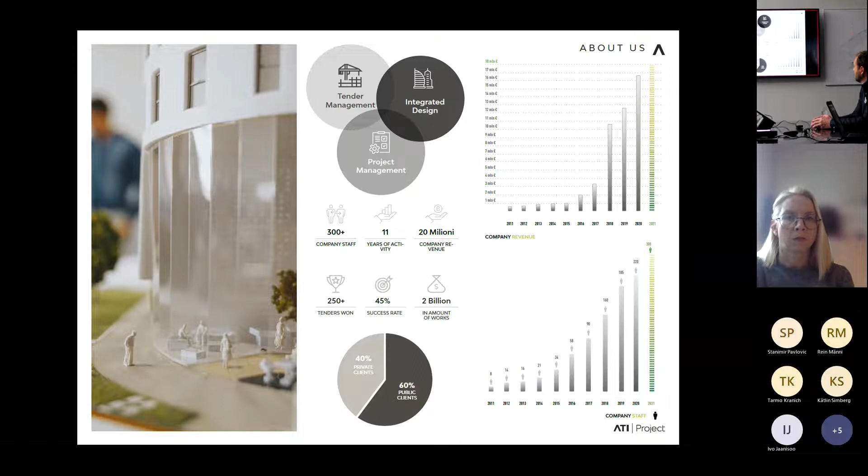Then we have tender management services, which very often follow up to the project management services. We start with consulting in the tender stage, sometimes for general contractors and sometimes for public authorities or private investors, and then we follow up during the construction stage. We were more or less 60% public and 40% private investor, just to give an idea.

When we speak about tenders, we usually have this double possible involvement. When we work for general contractors, usually the first question is: how can you help us evaluate the tender price and conditions, and how can you help us win the tender? Then, depending on which procedure we're dealing with, sometimes you do value engineering, sometimes you organize the construction site.

Sometimes there are particular requirements regarding BIM. Sometimes the client wants to know how you will manage the process, how you will organize design or construction, how you will guarantee health and safety conditions, how you can assure that what you're going to build will be useful for maintenance and so on.

Those are typical questions in the tender, in order to find the right answers and to help and consult general contractors on how to write the best possible solutions to win the tender and then perform the work in the best possible way. On the other side, we basically get the same questions very often from contract authorities: okay, I have to tender this, whatever it is, a 200 million building, a 1 billion road, or whatever.

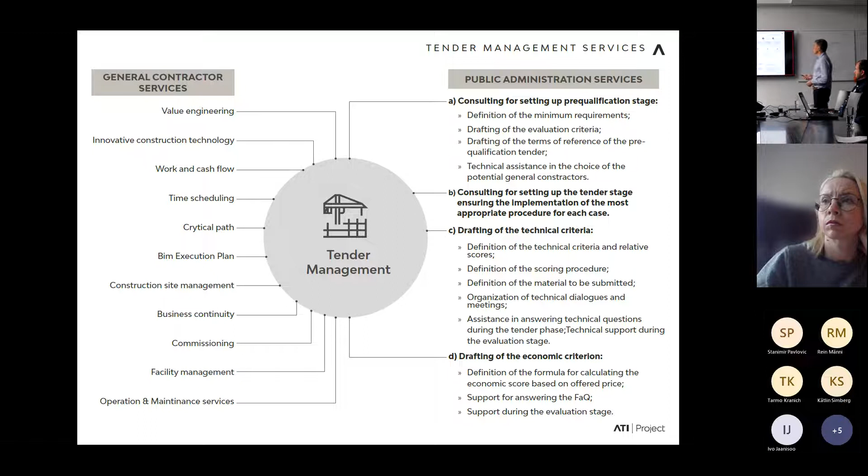Here I've listed some commonly used procedures: open, normally for simple tenders where everyone can participate with some thresholds; restricted procedure; competitive and negotiated, where people who are pre-selected can then compete within the tender procedure.

One very commonly used, maybe even mostly used, is the competitive dialogue procedure, where the tenderer is asked to give their contribution to the development of the tender procedure itself - I'll show you some examples of this - and then some particular procedures like innovation partnership and design contests.

In Europe, every country has its own law, but per European directives, we have thresholds for the obligation of not only engaging the lowest price tender, which is 140,000 euros for design tenders and 5.3 million for building tenders.

So when dealing with a tender higher than this, the price cannot be the only criteria. We need technical criteria along with price, and of course there are different regulations normally within the contracts with different important chapters and articles that have to be included.

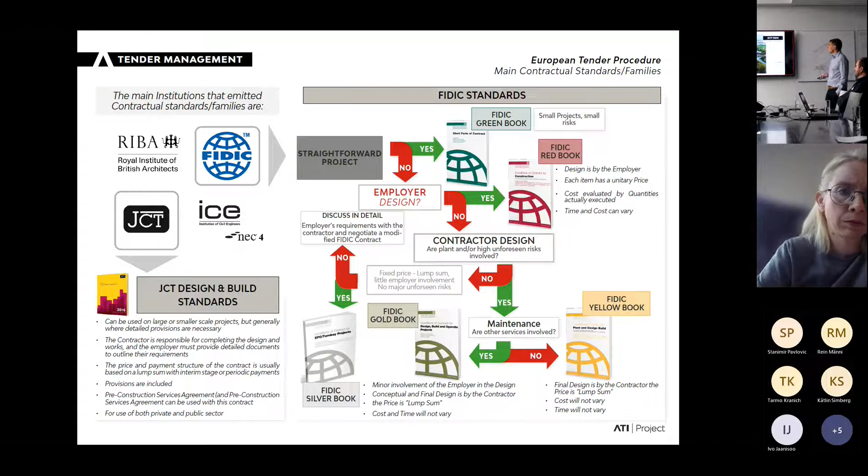So this was just a really short introduction, and now I'll try to extract the most interesting points for different procedures, just to put it on the table and share this experience with you.

Sorry, I have a question. Do you have any experience also with IPD or alliance type of contracts—integrated project delivery, used in America, also in Finland, more in Australia?

No. Like with this, do you mean design and build, or? No, it actually goes beyond what was the contractor or general contractor at risk. Together with the maintenance after? Yeah, it can be together. It's like you bring the whole team together at the very start of the preliminary design, even. You have the designer, contractor, client, and the user already involved.

Well, under this single IPD, I never worked actually in the United States, so I don't know. But some of those contracts, for example, this one was a typology early involvement contract. Even if it was not involvement in the conceptual stage, it was competitive dialogue, but with a stage of 7 months predicted to work together in order to start the proper contract. So actually, when the tender was awarded, the final contract was not signed, but the pre-contract was signed with the clause that it can be cancelled after 7 months if you don't reach the goal, of course paying some expenses, covering some expenses during this period. So it is probably what you are talking about, even if I never worked under this specific term that you use.

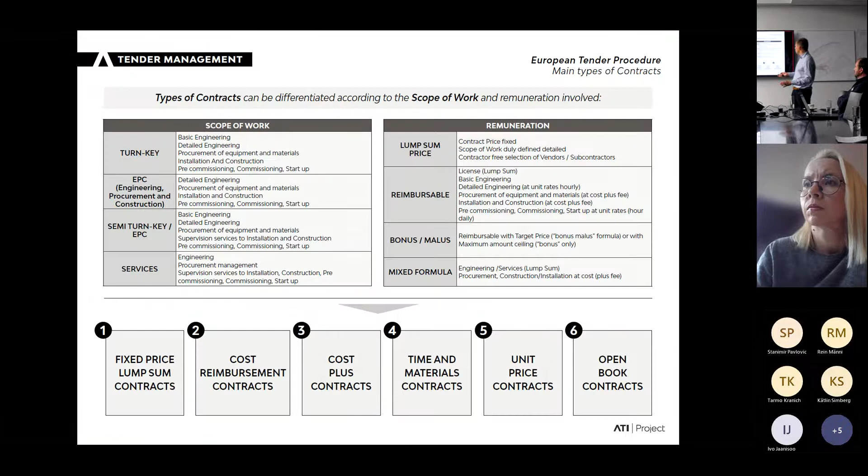With IPD, there's actually just one contract between all the parties. The client doesn't sign several contracts between the designer, the contractor. So it's what we call in Europe turnkey - because it's, for example, as far as you explain it, it's a single entity or contractor, so one owner under a single contract completes all the stages, from basic design to detail engineering, and very often there is also financing, procurement, and maintenance under this one.

It's not exactly the same, because you don't hire a contractor and the contractor manages everything, but you put together a team, a project team. So essentially it's like... they work together, coordinated by you, but there is no single entity who... Yeah, everything is shared, open book, etc.

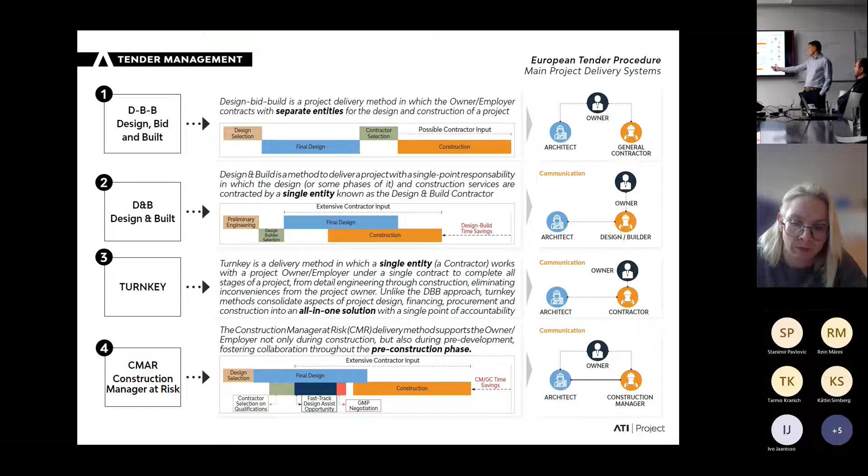So I would say it's more like the construction manager at risk, like the one. But going maybe even further than that. For example, this one in the United States, it was open book, but still the client was paying a general contractor, but for each and any item that was supposed to be delivered, they were supposed to get at least 3 offers on the table. It was, since the tender stage, you quantify what are your general expenses, overheads, markup, and so on.

And so then, together on the table, you, general contractor, together with your designers, which is us in this specific case, advise the client which one is the best compared price-quality offer, and then the final choice is theirs, and you simply put your markup on that. But it's actually an open book system. However, it's managed by the contractor, and the contractor is the one who gets directly paid, so it's not the owner paying every single subcontractor.

Maybe legally it's different, but operatively it's probably very similar to that one. But even if it's a different procedure, the concept of open book, of opening up and the cooperative spirit between the contractor, is always more present, especially in Central and North Europe. For example, in Italy, it's still not like this.

In Italy, usually you do this, it's called offerta economicamente più vantaggiosa. It means best balance between quality and price. Usually you have some points for the price, so the more discount you give, the more points you get. And then you have some points about what's called project design improvement - it means you get the design at the beginning of the tender. In the tender documentation, it's listed what specific aspects you want to improve: energy performance of the facade, renewable energy resources, easy maintenance finishes, or energy efficient lighting. Each of these gets points - 10 points, 12 points, 8 points, and so on.

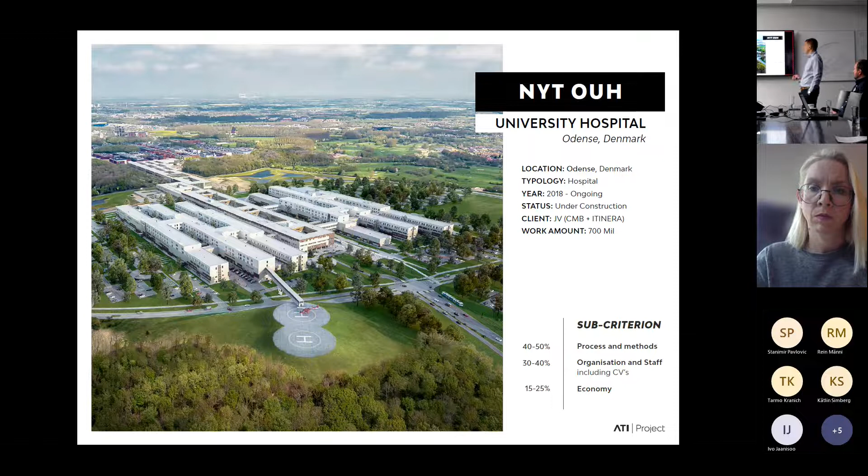Coming back to the tender stage, which was early 2017, end of 2016, this was what was on the table. The economical part was about 20%, and there was process and methods, organization and staff. In this process and method there was processes and also optimization, value engineering, let's say, the ideas how to meet the goals. Just to give you an overview, we are talking about over 250,000 square meters.

This main building is called the Knowledge Axis, which is actually University Hospital, and this building is connected with the existing university complex. There is a sky bridge under here connecting it, and another sky bridge 70 meters long connecting this with the helipad on this part.

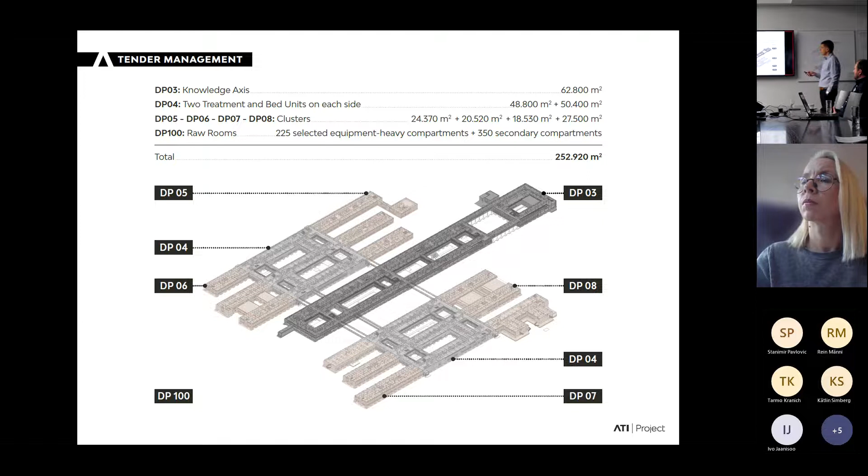So it's actually the biggest hospital in Denmark and maybe the third biggest in Europe. It's very, very big, and the total investment together with the infrastructure and landscape part is over 1 billion euros.

So the main questions that the tenderers were asked - before starting the competitive dialogue, there was a pre-qualification procedure. We started as 7 companies, then one was eliminated, and we were 6. Two of them Danish, one in Norway, one Spain, one Turkish, and one Italian.

We were participating together with a joint venture of 2 Italian companies, CMB and Itinera, more or less a little bit less than 1 billion each of turnover.

And so they were asking when, how, when. Tell me about value engineering, tell me how you will manage the design phase, tell me how you will manage execution. So in terms of procedures, in terms of organizations, in terms of methodology.

Actually, Danes are really fixed with methodology. They really want you to plan every meeting, every day. It's really very important, a pretty different philosophy. I learned this for the first time there. I like it actually, but it was pretty strange for me in the beginning.

So why do you ask me when we have to meet after 1 year? You know, let's see what we are going to do next week - it was like this. No, I want to know because I need to plan my vacation in July 2024. It was like this.

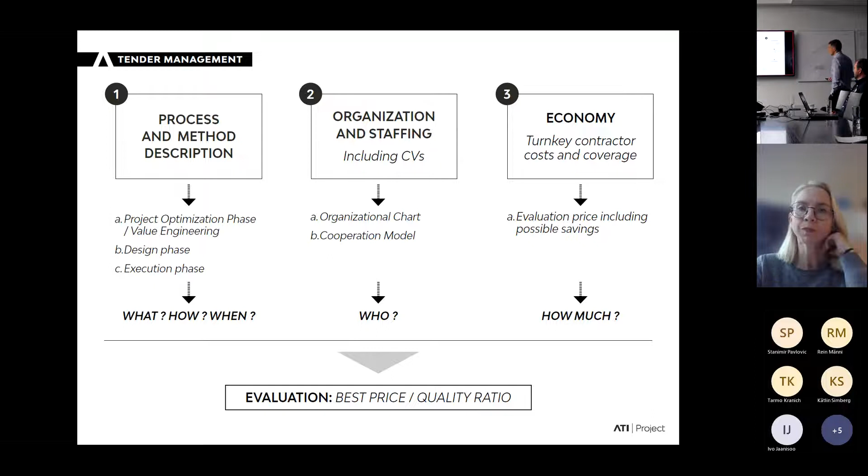And then, of course, the relation about price, which was also really pretty interesting. I will show you something. So we started with a model like this.

They were asking us, okay, how will you - we have only these concepts. We don't have even the structural scheme and the pillars design. We don't have windows, we don't have doors. We only know that this is supposed to be 650 million, and we know that we have 610 in the budget. So what do we do, basically - that was more or less the story.

And then we started explaining our idea of how we will manage this project. We will analyze the documentation, we will make the preliminary report about that. Then we will go with our checklist of different items that, in our opinion, could be optimized.

But still, the problem with value engineering is always one: it's not so massive work if you do it once, but it becomes massive if you do every item 12 times. So you have to be very skilled to find a way to say, okay, I'm thinking about optimizing the structural system from cast-in-situ to prefabricated, writing only one line.

Then asking, are you interested to know something more about that? Then they say yes, check it. Then you do the second step. And you say, do you like this second step with some development? Yes. And then third step, you do the bill of quantities before, after, design, and everything.

So the idea is to limit doing too much work before you get approval. It's always about having a good cooperation and a good dialogue with your client, so you don't overwork too much without getting feedback on whether this is good or not.

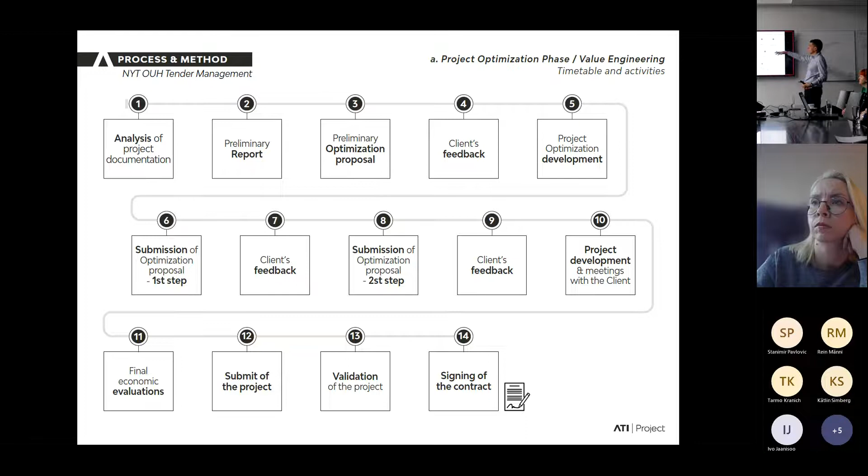You go to different meetings and checks to do the final economic evaluation, then implement the project, submit it, and go for validation. That was the process, and it was much longer than this, of course. It was like 50 slides just about the process, but this is the one that maybe summarizes it best, I think.

Then when we go to these scorecards, for example, one of the proposals had an initial solution where the design manual stated that all the facades would be cast in situ, really long and expensive. So we found a way to propose the cellular system facade, which was prefabricated, so much faster to do. Then we also did some optimization in terms of window positions.

This is, for example, coming back to the classification system. Codification in BIM models is sometimes really useful for quality checks. For example, the first time we modeled it as it was, then you see that you have, I don't know, 2,346 different typologies of windows, because they differ by 5 centimeters, 3 centimeters, and you say, no guys, this has to be rationalized, it cannot be like this.

The codification of the models is very useful to see how many different items you can integrate into the model, and how many different typologies you have, and then you start thinking how you can optimize this. We found really many problems with this. So this was one proposal, one that was accepted.

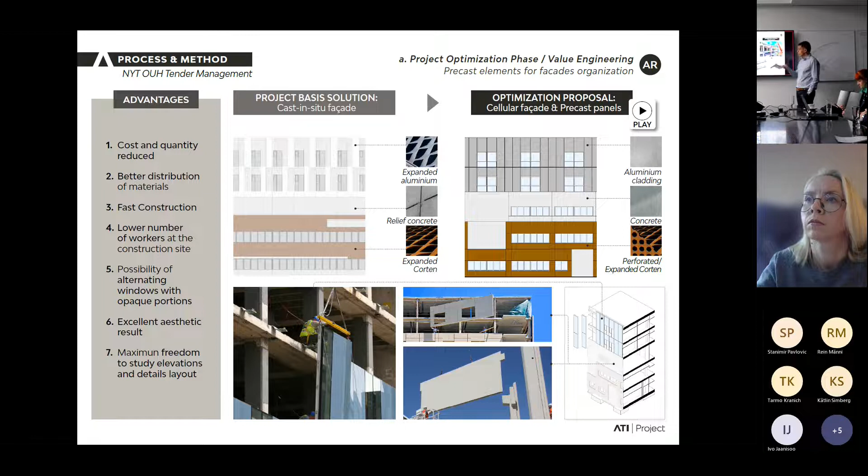The same was true with the structure. Most of it was cast in situ, basically because in some preliminary meeting, somebody from the users said that in hospitals you actually work better in the later stage with a cast in situ slab, because when you need to attach medical equipment, you can do it anywhere. But when you work with prefabricated slabs, you cannot attach things everywhere. You would probably need some metallic structure underneath, and so on.

But basically we said, okay guys, let's see how many rooms are actually the 'hot' parts of the hospital. I'm talking about operating theaters, intensive care, and rooms like bariatric patient rooms. We made our analysis and found these are 14,000 square meters out of 250,000. So we said, okay, let's go for prefabricated slabs for all the rest and do cast in situ only for the 14,000. Accepted. Stupid example.

But those are things that really change things, because manpower is very expensive in Denmark, and we went from 130 euros per square meter for cast in situ slab to 72 euros per square meter for precast slab. Multiply that by 230,000 square meters, and you get a lot of money.

And this money is then set, and there is an incentive method. While you're saving up to the target budget, this saving allows you to sign the contract. If you manage to make additional savings, there is an incentive method. In this case, it was, as far as I remember, 60% to the employer and 40% to the general contractor. So if you make additional savings, there is an incentive method, and part of this money goes to the contractor, which is also fair, and it's written in the contract from the first moment.

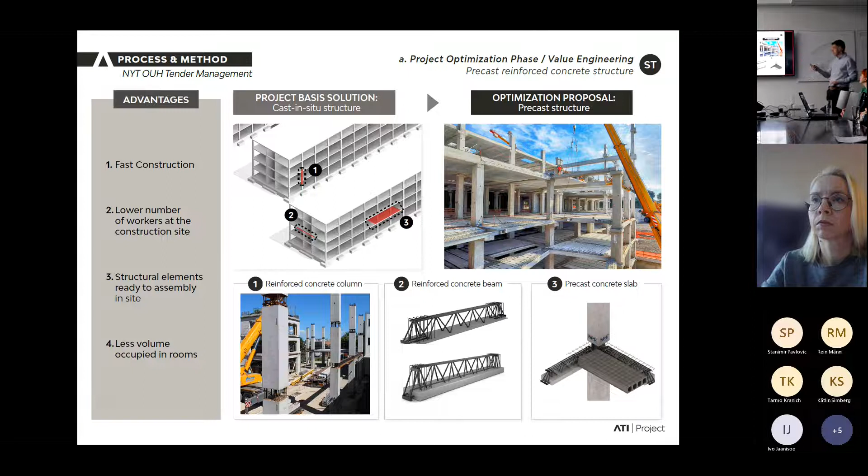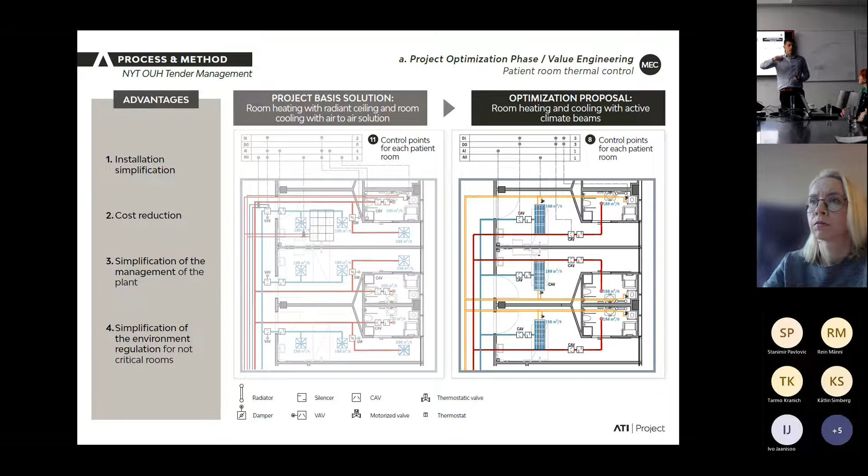Another thing is about the heating and cooling system. For the heating part, it was a radiant ceiling, and at the same time we had a fan coil system for cooling. So we had a double system for heating and cooling. What we proposed instead were chilled beams, so only one system doing both hot and cold, and this also saved a lot of money, also lowering the thermal inertia because it was faster to bring the room to whatever temperature you want.

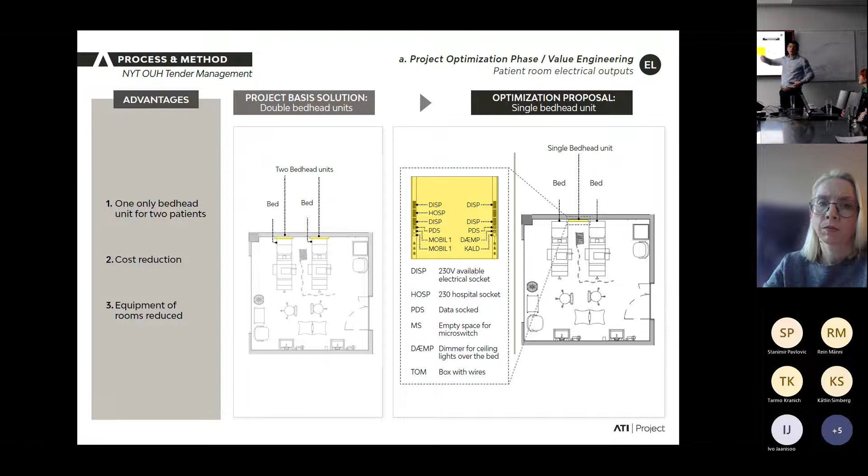Then, for example, there were some rooms with double beds and a double bed head unit, and we said, okay, let's keep the single bed head unit but with double sockets on the left and right side. If you multiply this by however many, say 500 bed head units, this will be a good saving.

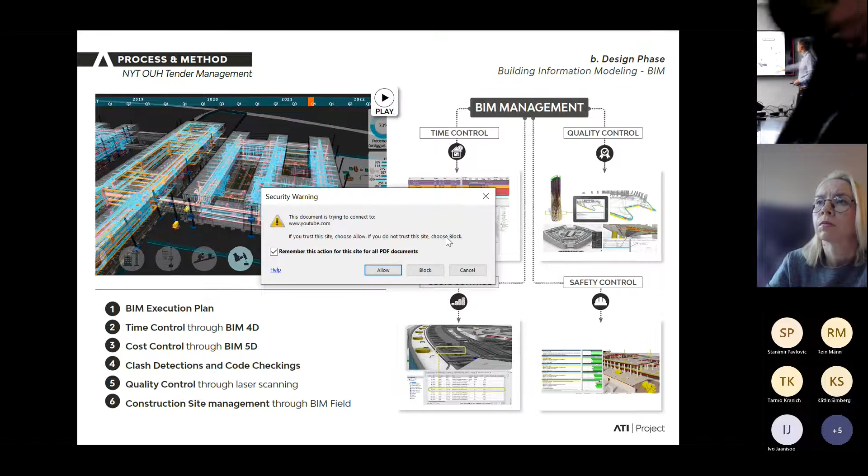And actually we show them, I don't know if I can, how can I put the video from here? If this is this computer, yes, then I can start it from here. Ah, okay, yes, fine, thank you very much. Security page, we allow, should be on. Oh, it's really a short video, but just to show you.

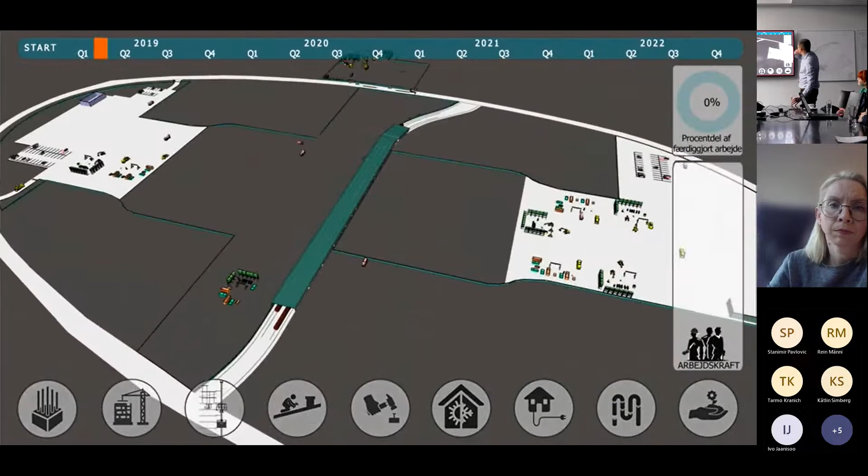So we tried to do them. You can make it larger here. Scroll down. That's an aspect that I told you before. This was the protected dialogue, so we can first...

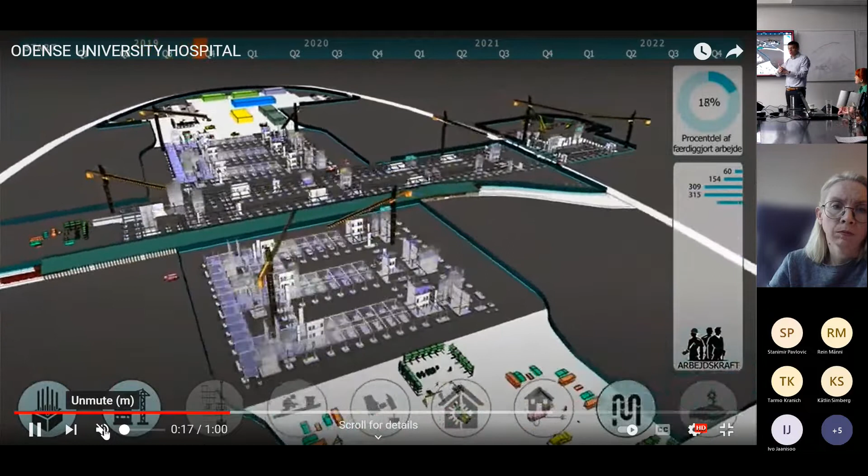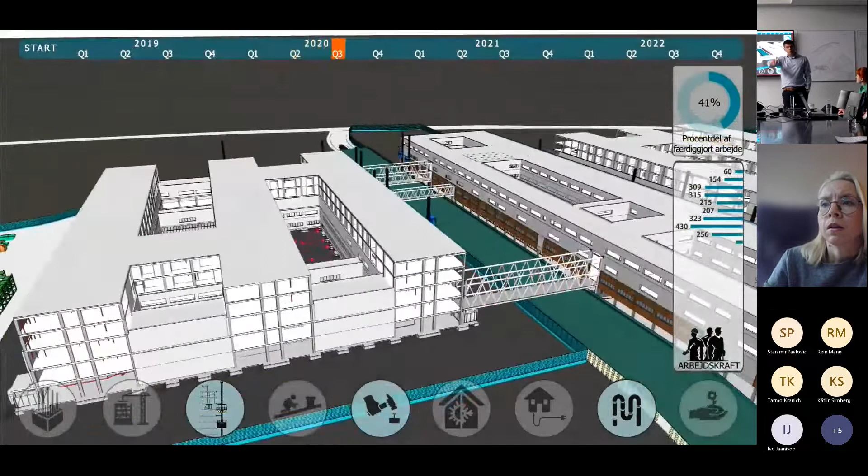Take the timeline schedule. We mapped every element with the timing of when it will be built. We mapped it together with the cost and also the manpower needed to put it in place. So you really had, like, this zone of ceiling, and you know that it will be built in March 2023, and that there will be 12 workers doing that.

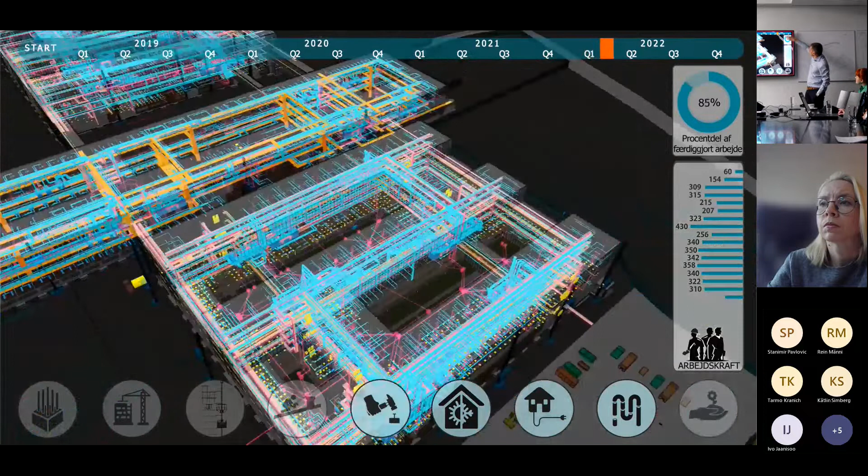And therefore, we calculate from there. The software calculates automatically, and this is the animation that is done in Bexel Manager, month by month, the manpower. This is the global progress during the different months of the construction site.

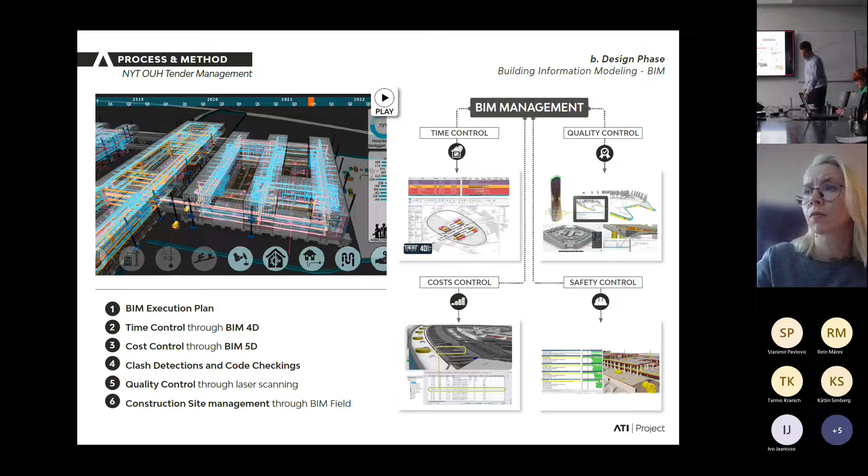And they actually really like that, because we consider ourselves, and the construction company we also met in Odense, we consider ourselves the most skilled BIM 4D and 5D designer in Italy, and they are the most skilled construction company. So we showed a lot of these things, and they liked it, and this allows us to get more points and hours of this standard. And still, we are using all this system during the construction stage, and we are now at almost 70% global progress.

So 4D and 5D are tracked in Bexel Manager, right? Yeah, and actually we use many software — we work with Dynamo, we work with Navisworks, we work with Solibri. Now, if people from my BIM team could continue the list, I'm not so deep into this, but actually we really find ourselves much faster in Bexel Manager.

Because we know that company — this company was born in Serbia, then became an American company. They were software guys, they were not doing this type of work, they were just programming software, how to say. And they were actually working generating the plugins for Autodesk. Autodesk was a client for them.

And the good thing is it started because some people in this company, and also our general director of the Serbian office, who is my best friend and also connected somewhere here, he was technical director of this company for 10 years, and they were actually working on the same table with the designer and the general contractor, adjusting things as actually needed according to the designer's needs, to make it more flexible. From that point, we started using it, and for 4 or 5 years now, we are basically using most of this software.

So I strongly advise it, and if you're really interested, we can consider it, because it couldn't be managed in a 2-hour lesson. But if you're really considering this, I can organize somebody more skilled than me to open the models and make a proper workshop, whole day or half a day, getting into the models and doing something. Or maybe we can even do it online. Let's think about that. But for us, we are available, no problem.

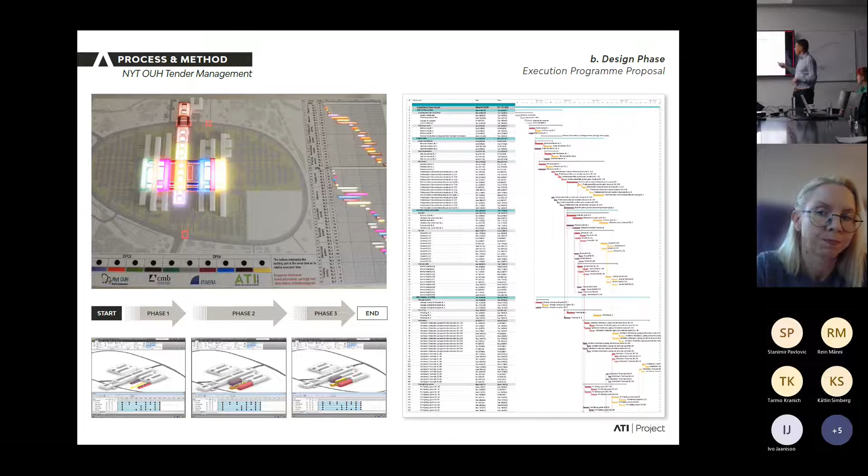But normally, the contracts are done - you normally use a contract only if you go to fight, if you don't need it if everything goes well. So that is the wrong interpretation, that this should be kind of conflict. Working this way, we actually are really very happy, and they are also happy with us.

This was another question: how we will manage the construction site. The first tender was called DP05, then the second one, 65,000 square meters, then these two buildings which were additional 100,000 square meters, and then those 4 buildings called clusters. On each of those tenderings there was also a 4th one, which is the medical equipment inside, and we won all 4 of those.

But basically, it could happen differently - for example, we won this first one and this building here, and then some other construction company wins this one and this. So it was actually very challenging to make the construction site organization. This construction site organization, when only one company is working on site, is not difficult, because it's pretty greenfield - there is a lot of space around to stack materials and so on. But if you try to imagine it as a separate construction site for each of those zones, think about accesses, think about interferences - it is really a mess.

And of course, even if we won the first 2 tenders, when you do the 3rd one, you don't know if you will manage to win it or not. So however, you have to invent the solution, how you will manage the construction site with the interferences with another company. So that was also challenging, and we did some exercise on that.

This is, let's say, the easier part, or more standard one - it's always asked to show the organization chart, how many resources you will put, how your technical office will be organized, how your management office will be organized, and for each of these figures you need to show the CVs, the track record, the performance, and so on.

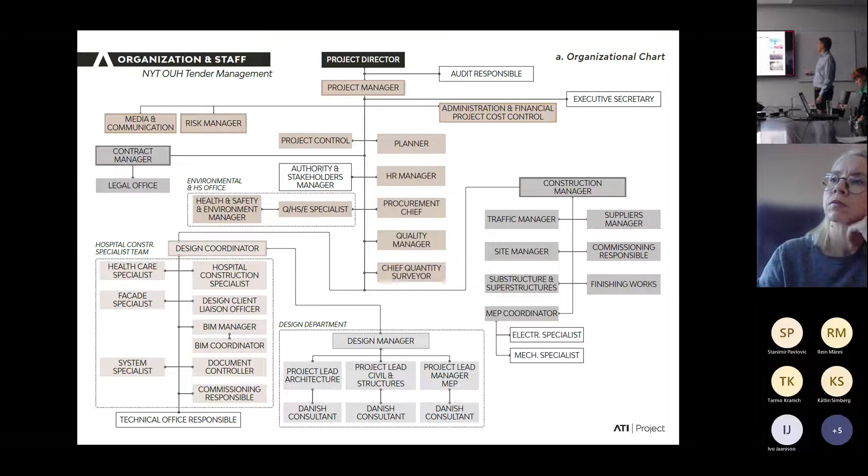And then this is the Danish style thing - this is about organization of cooperation. How many times we meet, what kind of meetings we do, BIM coordination meetings, health and safety meetings, contract meetings, high management meetings, steering group meetings, and how we are monitoring progress, how we use the BIM model to comment directly about changes, tracking of progress inside, and whether we can have virtual reality to go through the rooms. So this was a small slide.

Also, this one is not one slide, it's many slides, how we replied to this. And this is actually what we did after - some of those things we are still doing, as it was part of our technical offer in the tender.

And this was the economical one, and it was actually really interesting in this tender, because they asked to quote - the problem was fitting in the budget. There was a basic quotation about works amount, but actually you were not getting your points, these 25 economical points, by global quotation, but by quotation of one part of the economical offer, which was general expenses, overheads, insurance, design fees, and markups.

And another thing is called the Danish Winter Act, because there are some special provisions you have to follow - if you have ceilings above your head in Denmark, you cannot work without at least 15 degrees, even in the winter. So you have to close the building even if it is open while doing construction, and you need some money to do that.

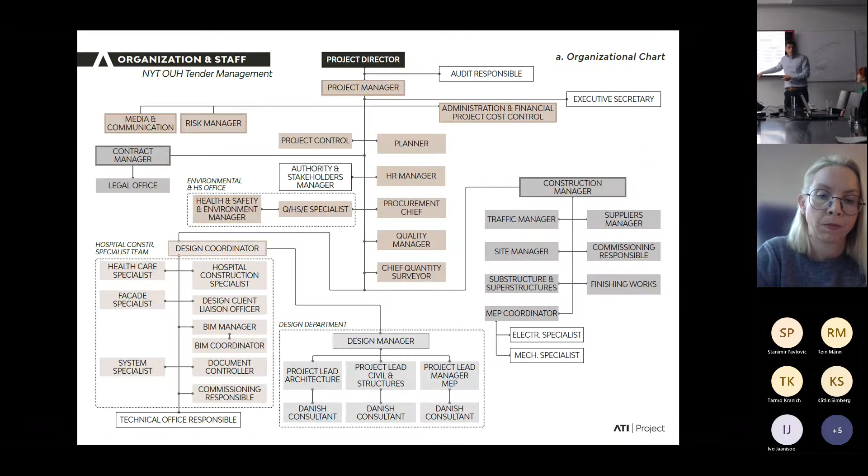But it's really fantastic, on the other part, because this was so reasonable. They said, I want to know if you want to earn 5 points or 15 points in such a tender. Tell me this. I want to know this nice technical structure that you presented me here with these guys, with the CVs of 25 years experience, and with all this meeting and all this nice stuff that you promised. What is the cost of this one? I want to know it immediately.

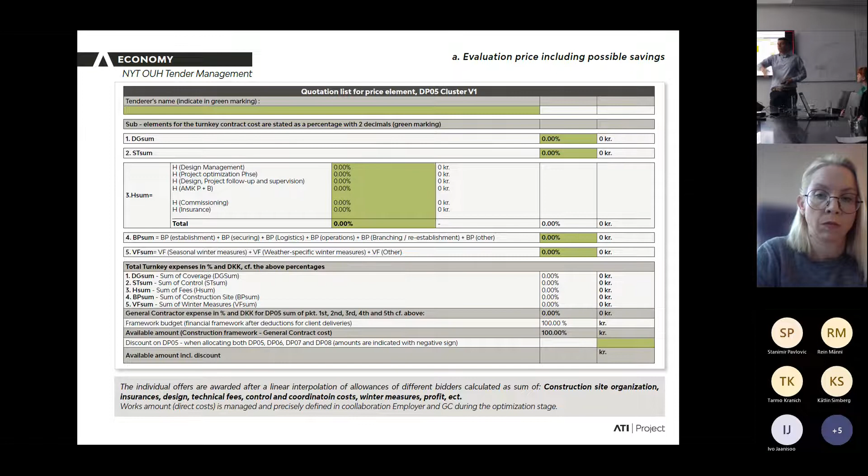And how much you want to earn, and how you will manage the construction site, and how much this will cost. I don't care now how much the heating pumps will cost and facades, because I will ask you to bring me 3 offers and put it on the table. Basically, this is the idea.

All of this was managed since that stage, but still by BIM models. So coming back to the systems of codification, we worked in CCS and UBS here, because actually the cost plan was made by a general contractor, so we were exporting different data, different solutions, and it was really a massive job, because we were modeling one solution and extracting quantities.

Everything in this optimization stage was really heavy. It was strange, because we were working like 70% day and night, and at the end of this process we didn't have, say, 10 finished floor plans printed. It seemed that we didn't produce anything, because we were working on multiple solutions, checking the costs and everything. But the good thing was that we managed to fit in the budget and sign the contract.

So we were doing different kinds of models, and you will see after in one scheme, for example in Odense, we came to over 400 different models if you split different buildings and different disciplines. We are talking here about all stages: preliminary, main, and shop drawings. All together we produced 36,000 drawings. We are 5 years now on this project, and we first drafted the cost plan.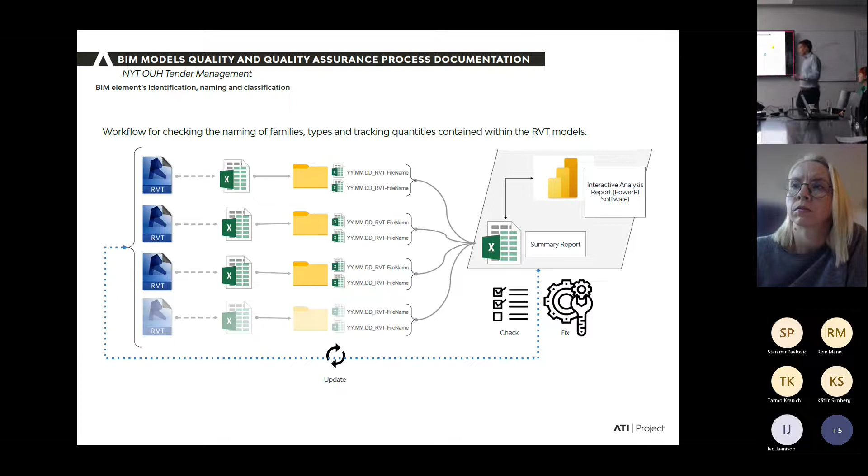we confirm it in the model. Here we use Power BI that I told you about, because this is actually pretty useful for these checks - do you have 800 different windows or not. So for rationalization of elements, number of doors, internal windows, it also really allows you control. Just to see door tags: 21,000 - yeah, this is a hospital with 21,000 doors. So every change you make is a lot of money, and the different kinds of rooms, materials - this is nice because it's also manageable.

You can work it very fast with the models. So models, when you import, are not heavy for the presentation, and you can extract in a pretty fast way.

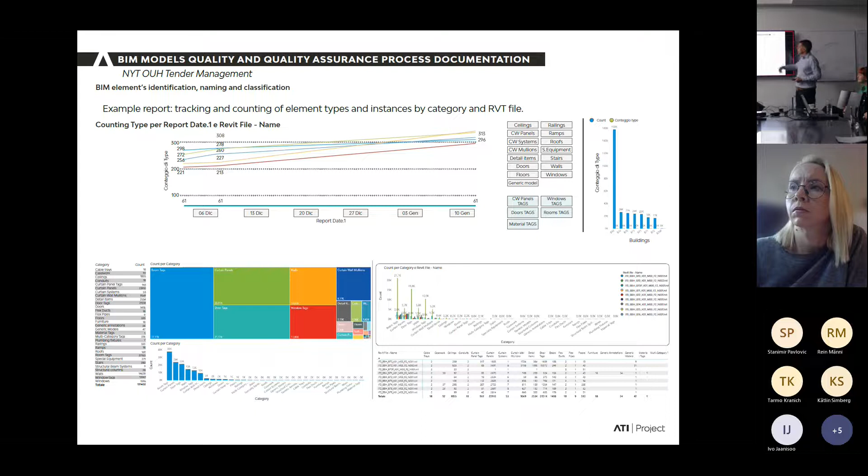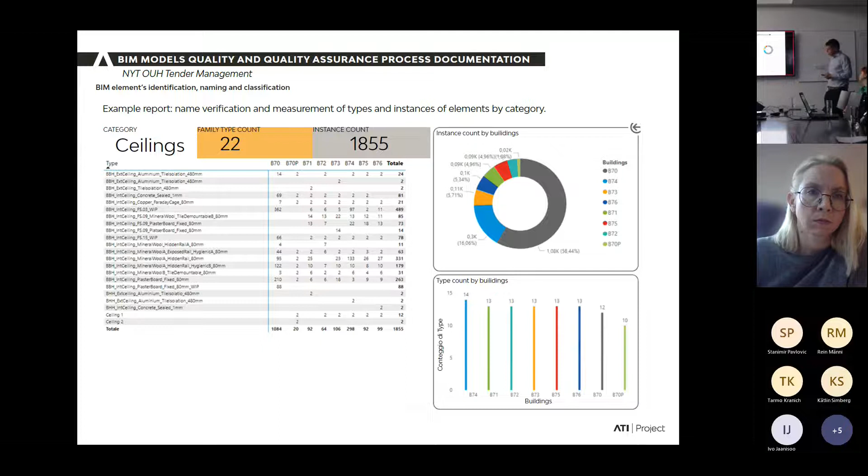Another thing worth mentioning is clash detection procedures. Many people spend a lot of time talking about that, and usually it's pretty easy to tell if someone isn't very skilled. Sometimes contracting authorities ask us to launch the clash detection report to demonstrate the project has problems, and you have, say, 35,000 clashes. But it really doesn't depend on the global number — you have to go deep and see what kind of clashes are there.

However you are modeling, you will have a lot of clashes that may register as clashes but aren't actually dangerous. So what we do is this collision severity matrix, with different disciplines and different kinds of work. For architecture you'll find walls, suspended ceilings, pavements, and so on, and you'll see which ones have a level of criticality: low, C1; medium, C2; high, C3.

Sometimes you'll have a cable floating somewhere near a suspended ceiling and touching it — it will detect the clash, but you don't actually have a problem. Or you might have pavement simply lying on the screed, the layers of the pavement, and these two layers touching might get detected as a clash when it isn't. This is a classic example.

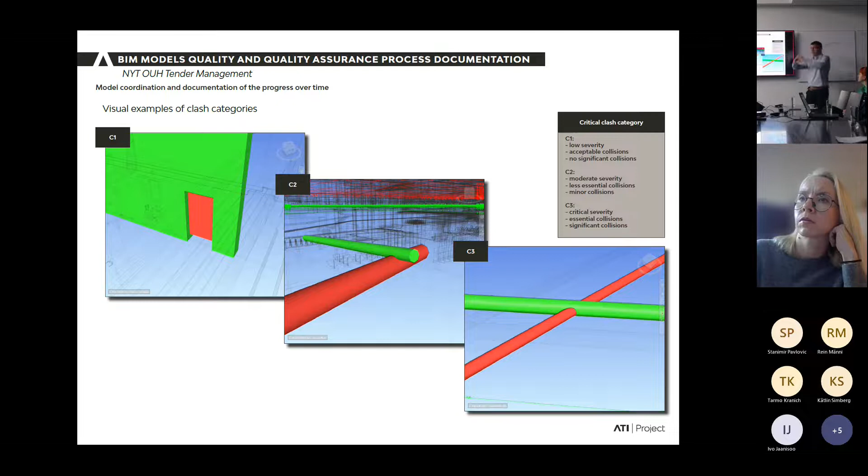So it's really important when you get a table like this. Usually the problem in the BIM world is that it's full of people very skilled in using BIM, but they don't actually have any connection with construction. One of your questions was very intelligent: what is the problem with the CCI system, or whatever coding system you use?

The main problem is that you're basically not modeling everything. This is always the first issue. If you don't want to go very detailed — sometimes we did it — but usually, for example, you don't model the steel in the concrete. So there's no codification system that will extract the right quantity if you don't model it. Someone, some quantity surveyor or whoever, needs to know.

Normally in foundations you'll have 95 kilos of steel per cubic meter, in pillars 300, in beams 250, in slabs whatever — to calculate the percentage incidence in kilos, then you extract the quantities of concrete. That has to be split into different families for foundations, pillars, etc., because the families have to be generated differently, since each family has different incidences.

But normally, whoever knows all this has 25 years of experience and doesn't know how to open Revit or use BIM. And whoever knows how to use BIM doesn't have 25 years of experience. This is the main problem. Everybody talks about magic tools — you click and everything is finished. No, there are no magic tools, at least in my personal opinion.

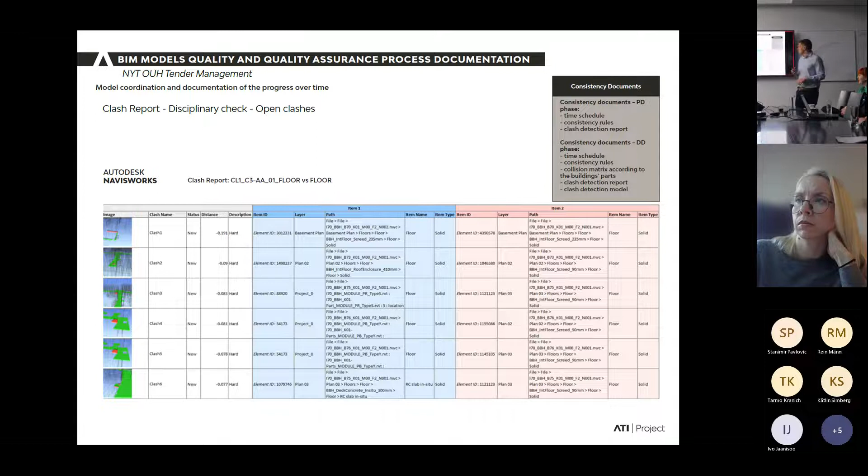I can't say for myself that I'm highly skilled in BIM — I understand pretty much about it, but not really. What I understood is that in our company we put together one skilled engineer or quantity surveyor next to one young BIM-crazy guy who knows how to do everything. If you don't do this, you're screwed, certainly screwed. Sorry for the French term, but that's really it. This concrete example was maybe the simplest one.

I can give hundreds of these examples. What about — how do you say it in English — when you cast concrete, you put the wood on the two sides, how do you call this?

Formwork, formwork, you never model formwork. You can do it, but usually you don't. Nobody does that. Still, you have to pay for it - some contractor will ask you to pay. So how can you extract this quantity from it? Or even easier, let's go even easier.

You will model the clay walls. Then I have a question - how do you find these clashes? You have in the model so-called selection sets.

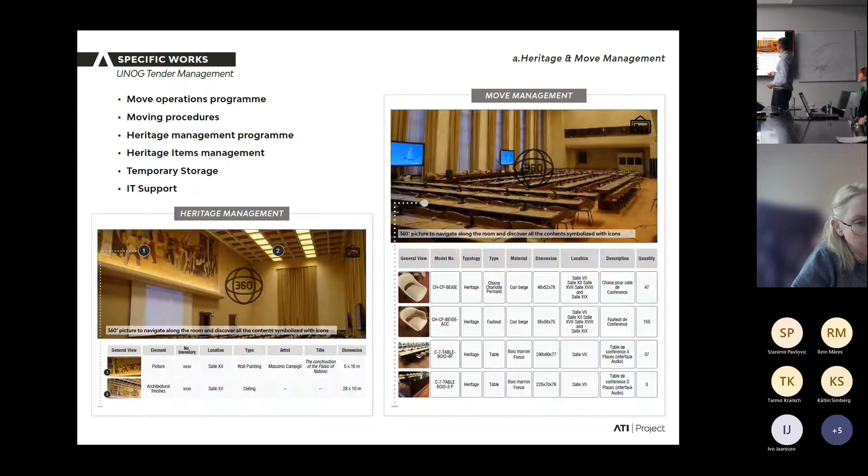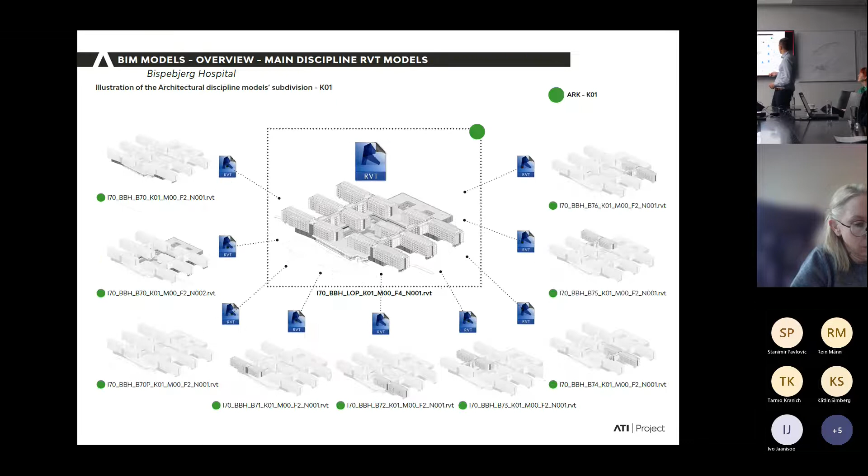So let me jump a few slides, just to explain this better. Okay, for example, first of all, when we are talking about a big project, you have to choose the part of the project where you are working.

So the first question you have to ask: what clashes do I want to seek? Because if you make clashes between structure and furniture, they are basically not relevant. Even if you find them, it means you put a bin in the model by mistake and it's somehow partly overlapped with a pillar - it will detect a clash, but you will never have this clash in reality. Nobody will put a wardrobe in the middle of a pillar. So first of all you ask yourself, what do I want to clash?

Normally the most dangerous clashes are between structural and mechanical, sometimes mechanical and mechanical, sometimes mechanical and architectural. Electrical is usually smaller in terms of space management, so you can more easily manage it - I'm not talking about technical rooms, but corridors and normal rooms. Usually holes smaller than 200 you do directly on the construction site. So you coordinate the bigger holes, because the smaller ones - even if you order the slabs - they won't make holes of 100 in the factory.

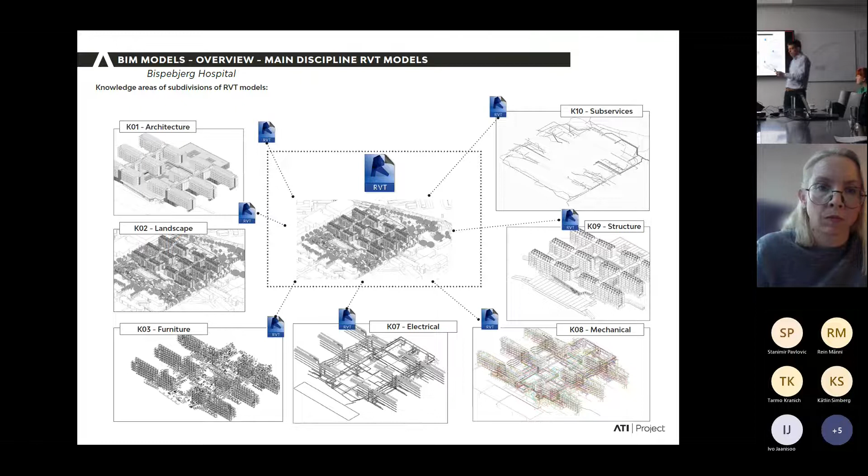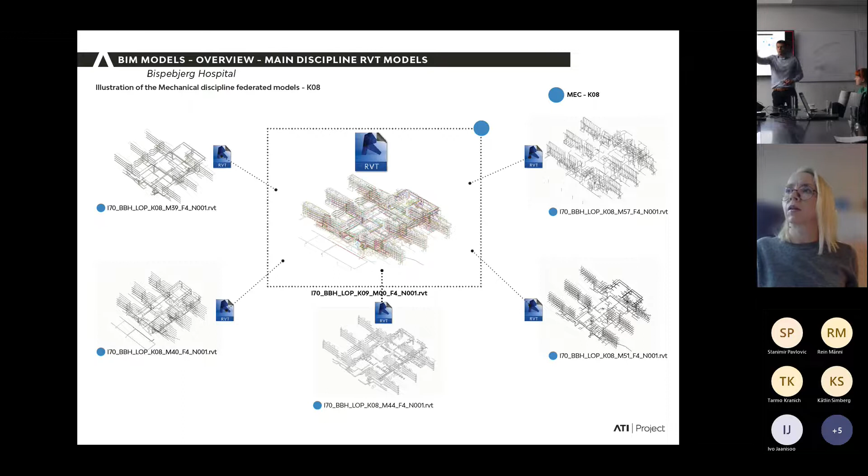But mechanical is an interesting story, and I'll show you here. These are different zones of the mechanical federated models. Each of these is at least 5 models - ventilation, cold and hot water, cooling, sewerage. This building has 45 models just for mechanical ventilation. So you can see here, those are parts of the buildings - B70, B71, and so on - I don't know exactly how they're divided. And those are parts under the mechanical disciplines: hydraulic, sprinkler, water mist models, high pressure ventilation models.

Okay, coming back to your question - let's say you want to clash ventilation with structure in Tower 75. Then you select only the model of ventilation for Tower 75, and only the model of structure.

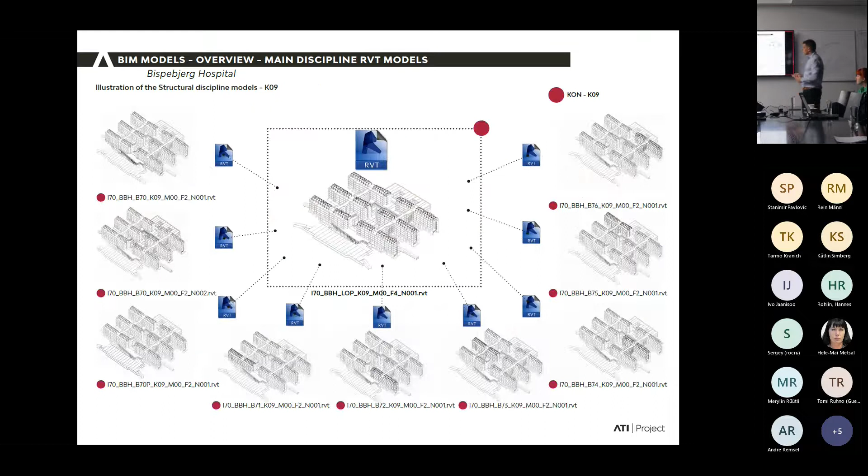You open those two models under a federated model of those two, and you launch the clashes in the software, coming back to the matrix, for this part of the building, and then you will have to repeat it for different parts and for different disciplines. This is an endless job, actually.

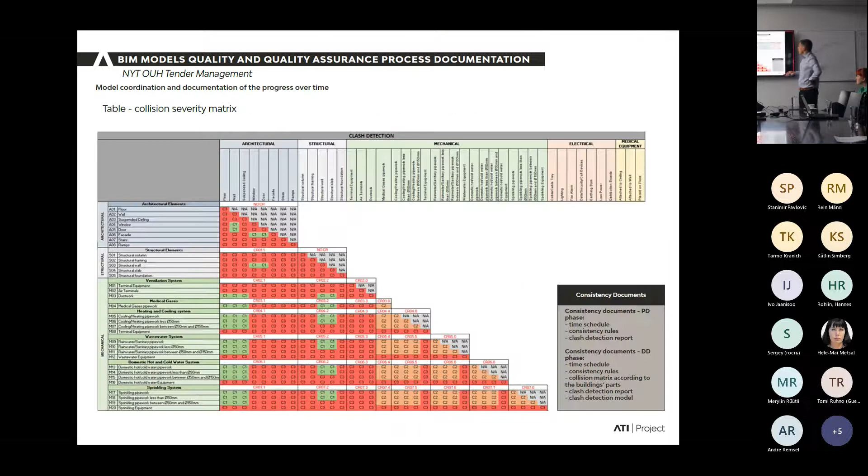It will generate something like this. Actually, it will come out directly from the software without any work you have to do. Anytime it detects one geometrical element that is part of the family structure clashing with one geometrical element which is part of family mechanical ventilation, both of building 75, it will make you a small photo like this and detect the ID of elements that are clashing, why they are clashing, how they are clashing.

The problem of, let's say, young BIM guys is that they think that once this report is out, the work is over. And the problem is, often even high-level managers, powerful guys with the money and everything, the only parameter they use is the number of clashes that you have.

But you can really sometimes have a model with 5,000 clashes with no problem for realization, and a model with 15 clashes with an enormous problem for realization. So the real work starts when the young BIM guy who puts this out passes this work to the experienced guys who know how to read that, and who also know to tell him what the real risks are, what clashes with what.

Because many of those, if you look at it, will be a cable that is passing down, or maybe you have an element which is in the sewerage system, you will have bathrooms that are going to the roof and taking aeration, okay? This element will be classified as mechanical and sewerage, okay?

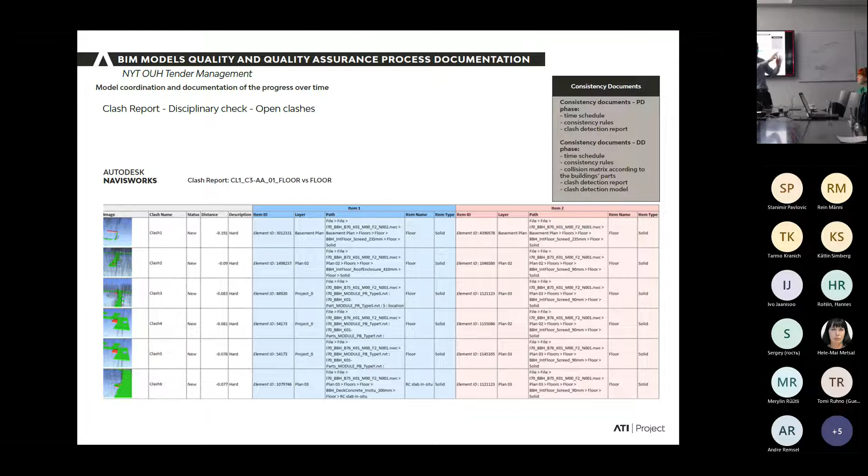They will open the OmniClass system and they will say, okay, categories are defined like this, then you put this wall in this category, but always without the final goal - why we do all this? Why we do it? Because if you don't know what you are doing, you have to start from the end. You have to start with, what am I doing with this data?

Okay, I want to click at the end of the month and understand what is the progress of my work, because I have to go to my client and say, this is the bill to pay. Or if it's a general contractor, it's different.

When you have a construction site like this one in Odense, at the end of the month, we are talking about - last month it was 17 million of monthly progress of works. So they present an invoice of 17 million, and how can you check if these works are done or not?

You have 800 people working on the construction site. How can you check it? So this is really the question where you have to start from: okay, how do I check it?

I will make 8 site managers that will be split in different buildings, and they are going to check what is there and what is not there. Okay, how will they check it? They will go with tablets.

Very nice, you buy him a laptop with a tablet. Okay, so what's he doing with the tablet - normally this guy is not used to using a tablet, because if he needs to speak with workers there, this is an old guy who doesn't know how to do that. And then you start really thinking, okay, let's make something user-friendly.

For this, Bexel is fantastic, because you can actually even select the elements. You go there and you see, okay, construction zone 21, the slab from pillar line 49 to pillar line 54 - the slabs are there - and you select it in the model, you check, done. And when you check done, you go to the quantity surveyor, he clicks, and an Excel file with all the quantities and prices comes out, and you can invoice.

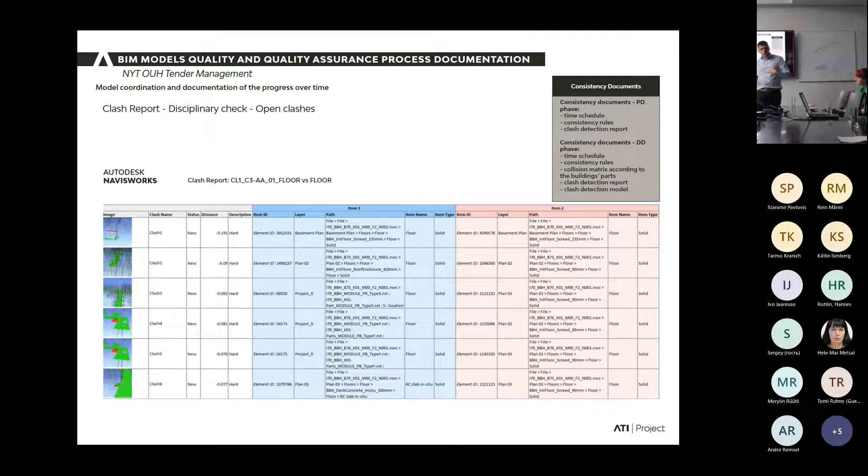Then we implement this system, and I present you the result. And in this system I'll also tell you there's a margin of mistake that's pretty high in the beginning, and as we go with the detailing of the design it becomes lower and lower. This is a fair way of working - the only way of working.

My real advice: if you want a really good BIM team - for quantification of cost, control of time, facility management, operation - you need skilled BIM guys, somebody who really did this work, who goes there and counts, and somebody able to present the results of all this. Maybe I'm the third one in this story, but if you don't have these two together, you'll just do presentation, and when you end the day, you'll miss cases.

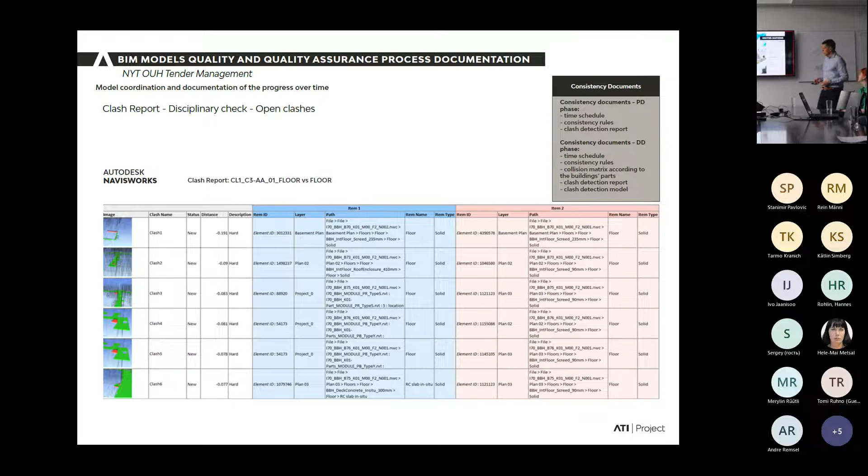Okay, is it mine? Okay. Let's move on. If you have any questions please stop me - I'm sometimes talking too fast.

Now let's move to Switzerland. Here in Geneva is the main headquarters of the United Nations building - a very important tender, and I'm really proud that we're working on it. The first time I entered there, I thought it was really impossible. I was 35 years old, now I'm 38, but it was a great pleasure being involved there.

We were 11 in the first pre-qualification. After a very rough first level, 4 were eliminated and we stayed among the 7 in this pre-qualification. We had a tender with very specific technical requirements, mostly because the building is existing, and they insist very much on so-called business continuity - since this is the United Nations, at the higher political level you cannot stop the running of some parts, while in the meantime you have to do a global refurbishment. And they're fantastic because they have their own laws and regulations there.

They're like a country itself in this compound. And so we went there on this tender, which was also 6 or 7 months, with 11 intermediate meetings with many models, many technical considerations, and so on.

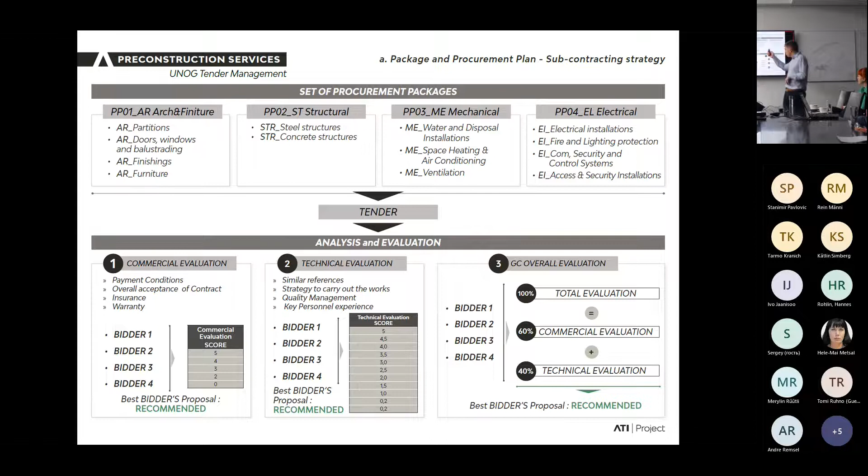It was extremely complex because, since the tender stage, the separate packages were asked to be priced, and they were actually compared and evaluated. So not only the global price, but also the single packages. And the technical evaluation was really difficult because they were asking for similar references, track record, and so on, but also the ways you will manage the specific needs of the construction site, which were really challenging.

For example, they had some asbestos material, so we had to do a survey to see where and how, and to provide the systems in the tender stage for the clean rooms and how the different levels of workers will go, what kind of suit they have to put on, how they can hygienize themselves, and how this material can be brought out. This was actually asked because they openly said, okay, you are the designer and contractor that has this kind of experience.

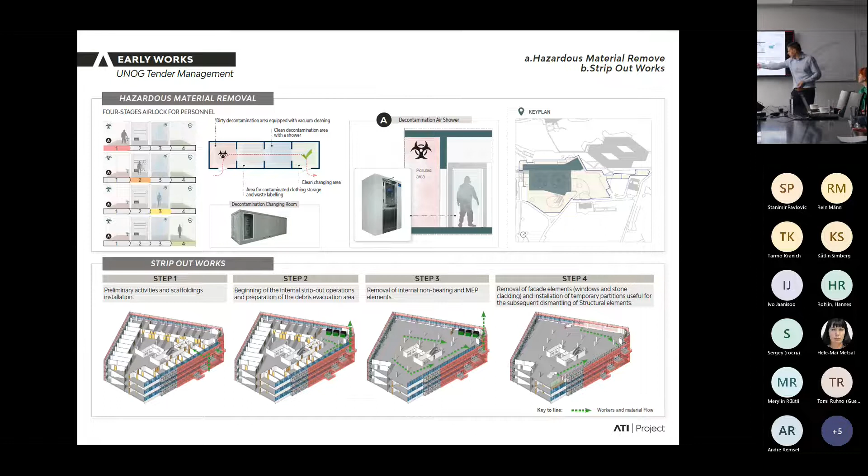The same was true with some strip-out works, because they said, okay, I want to reduce as much as possible the acoustic impact, and also the aesthetic impact to the facade, so where I enter for each floor, how I bring out material. So we were making these schemes floor by floor, how we are working and how we are taking out the materials.

This is something that is also related to many of your questions. They have their own facility management and data management system, which is also very interesting.

For example, once we won the tender, there was 12 months of pre-construction phase. And the pre-construction phase has as a main goal establishing the GMP, guaranteed maximum price. So in the tender stage, we were pricing design services and construction services.

And there was a lot of allowances, a lot of risks, because wherever you go, you find new things since it is an existing building. So those allowances were pretty high in the tender stage, and the goal of these 12 months was to do all the exercises, surveys, procurement, design work, and so on, to reduce it and say, this is the maximum price and I will not go over it. If you go over, it's contractor risk, so the contractor pays. If you match it, it's okay. If you go lower, there are incentive methods, and you get some money from the savings obtained. Very nice procedure.

Coming back, so the first one was condition surveys. We were uploading this to the Dalux platform and also to the Archibus platform that they use internally. We did all the inventory check. Every piece of furniture or heritage item was codified, with a system we agreed together with them, because before doing the works you have to bring them out, but only a very small part of this they are throwing away.

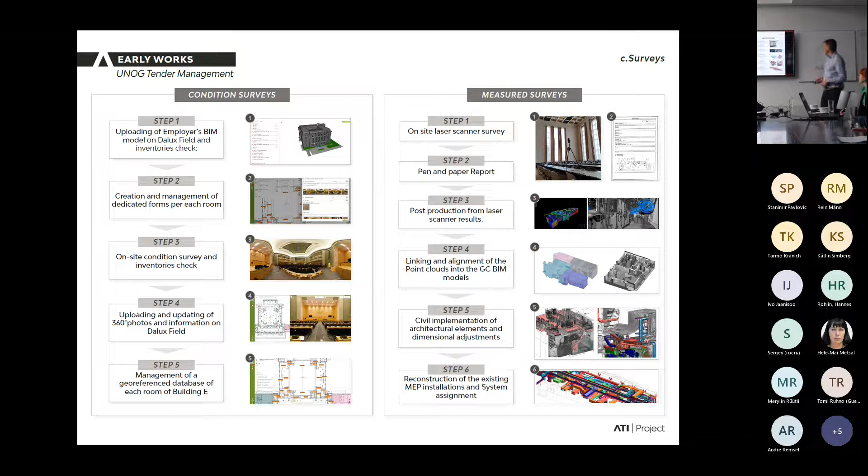So some parts, thanks to the efficient procurement of this firstly estimated maximum price, were reduced. Others were even increased because of the things we discovered through this laser scan survey that we provided. This is what I was talking about before.

So every chair, every table, every item - everything was codified according to its location, quantity, description, and model typology. All this was managed in the system, and all these activities were conducted directly by our on-site team. At a certain moment, I had 16 people working around surveying everything.

Then, coming back to business continuity - for example, in the facade system, they wanted to remove the old shading system and put some films on the glass to reduce the amount of sun entering. But we're talking about pieces of glass that were 12 meters high, and you had to do this work with all the communication inside permanently ongoing. So we put double scaffolding inside and outside, making provisional walls in order to keep part of the corridor used for users inside and another part for doing the works.

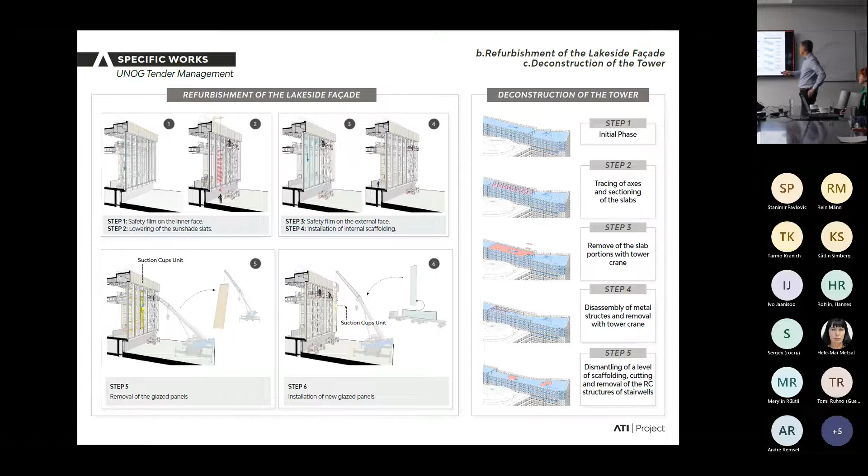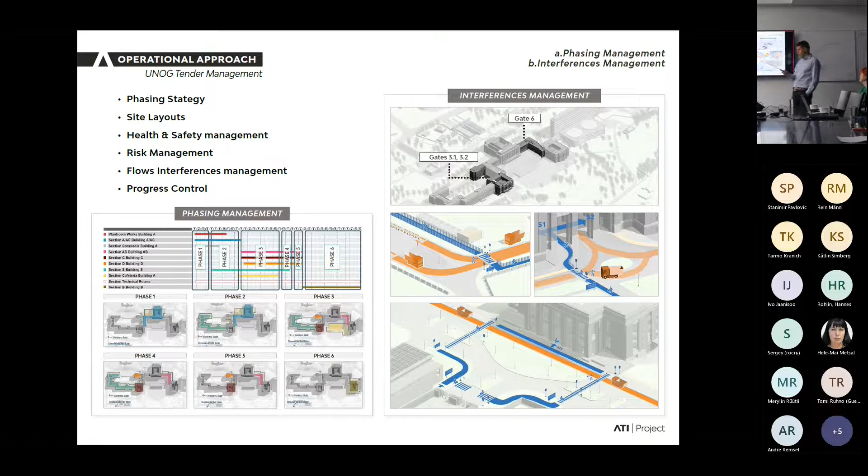But through all this time, you have people coming to work - some by foot, some by bicycle, some by car - and you also have the workers and the trucks for the construction site coming in. All this around the compound has to be managed. So the schemes, like the 2 or 3 you see here, we developed 56 of those for movement and traffic control, to manage how we reduce interferences as much as possible between construction site traffic and the people working at the United Nations.

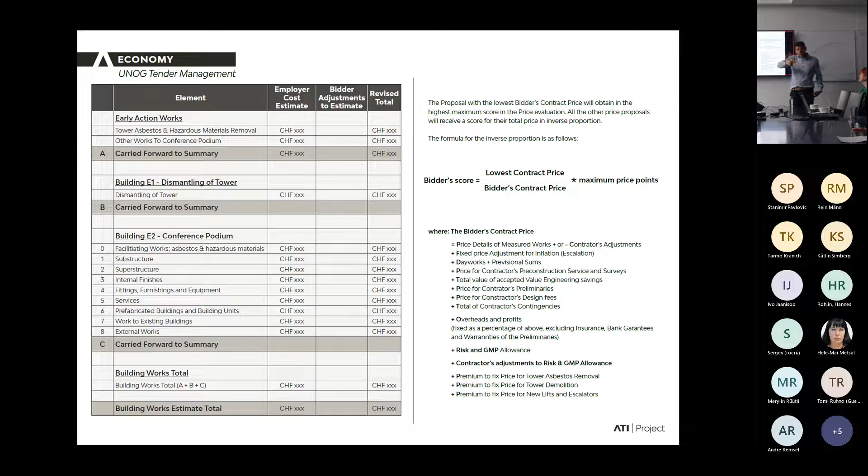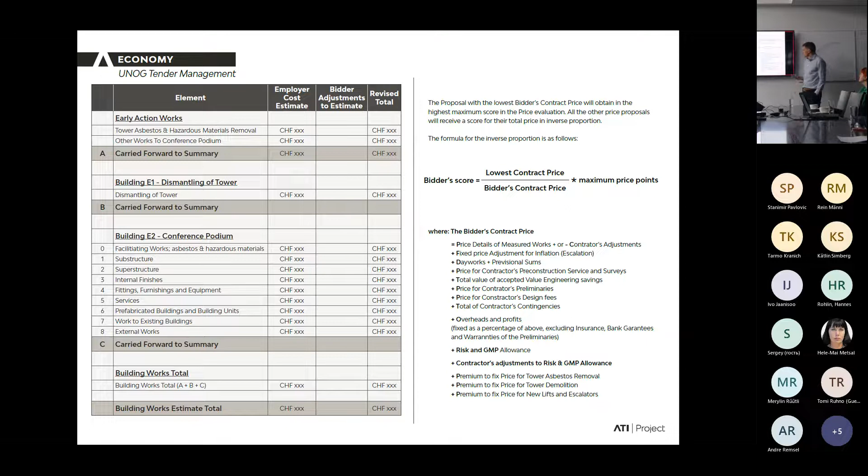Okay, so we are back in Denmark. This is the Bispebjerg hospital. I showed you part of this. How much time do we have? Okay, I showed you part of this presentation before.

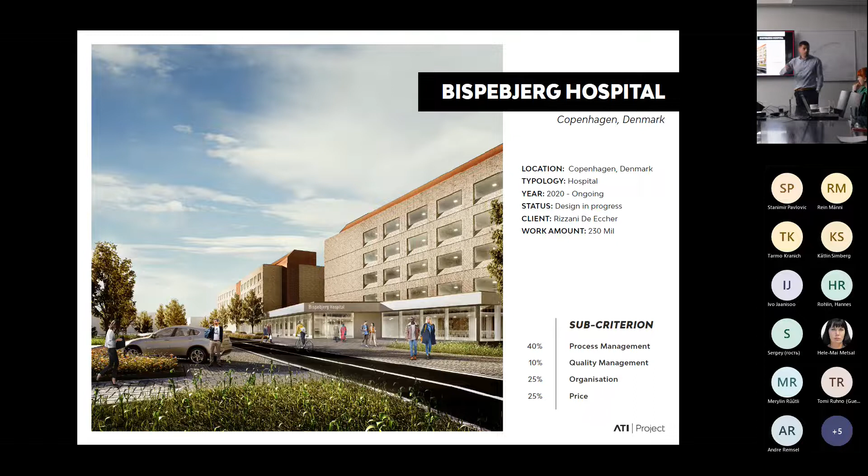This is a design and build contract, yellow book FIDIC. There was a preliminary design in the tender. However, they asked to redo the preliminary design once again to solve some problems and also to undertake responsibility as a contractor. In terms of points, it was 25% on the price, and you will see the interesting formula for price calculation, at 75% for other things like process and methods, quality management, organization, and stuff.

The particularity of this complex - we are talking about a little bit more than 80,000 square meters hospital, 230 million tender, to be built in two different stages, because basically we are building this large block. It's about 50,000 square meters. This is currently ongoing on the construction site. There is this building 7, which is part of the existing hospital. Actually, we are working inside the existing hospital complex of Bispebjerg, which is maybe the biggest one in Copenhagen.

Then once this building is finished, it has to be, even if partial, closed, handed over, and the people working in this building have to pass here, because then the demolition of building 7 is planned, and then finally you build the last 25,000 square meters with car park, some landscape, and the southern part of the hospital. So actually, the stages and the phasing are really very, very difficult in this project.

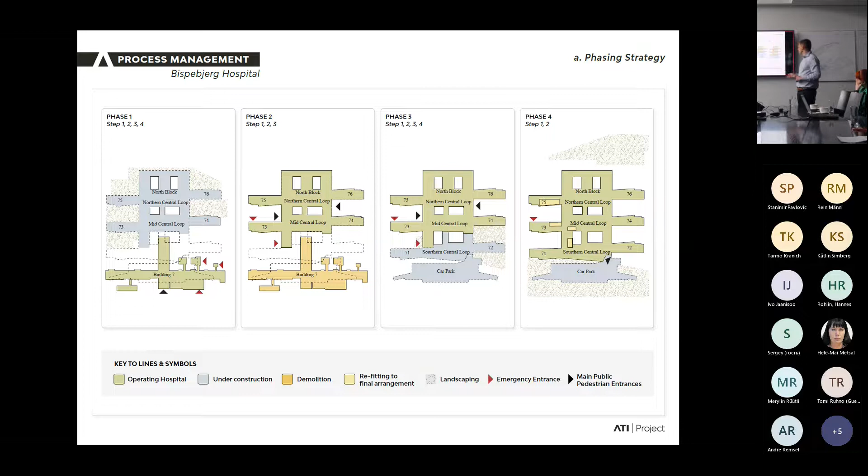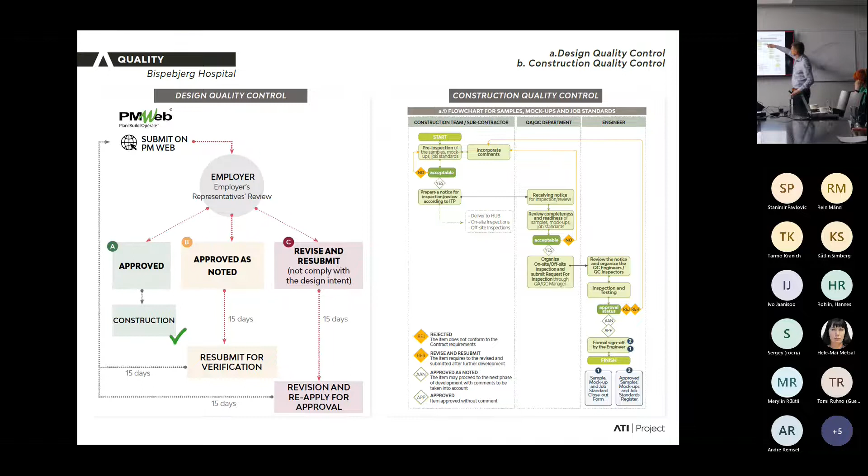They have Arup as a special consultant for this, and everything that is built even 5 centimeters different than predicted in the design, you make a so-called nonconformity report. Then you go through a similar procedure. Also during construction it can be accepted. If it is not accepted, you have to recheck and maybe even redo some work. So this was the procedure and how we explained in the tender stage how we would cooperate.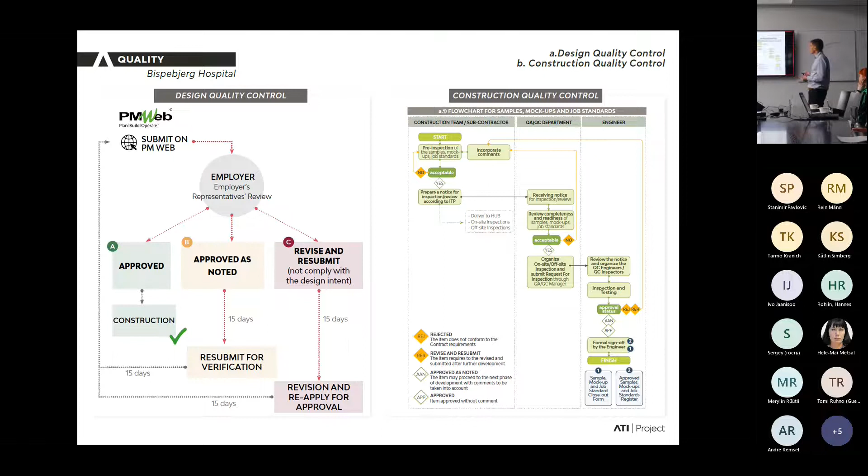This is actually how we are now working. And there, they asked for some notes about the commissioning process, so in our model the data is necessary for testing and commissioning. So all the data sheets, all the maintenance manuals, and everything are mapped in the model. This process is still not finished completely, because it cannot be finished before having all the subcontractors on board, since normally it's a MEP subcontractor that will do the running and commissioning of the systems.

Usually, always in the public tenders, the designer never indicates a specific product. Maybe you can say this will be the product or similar, but you can never fix that you have to buy this specific one, because it should be against the law.

That's why, since I saw some questions about this, the population of operation and maintenance data is almost always done in the final stage, after having all the subcontractors on board. I'm not talking about finishes, because for finishes you can just take the sheet of the paintings or the pavement. But for the MEP you really need subcontractors, otherwise you're not able to do that. For example, we finished this in a data center in Bologna, and not only scorecards and data sheets of each and every element, but also the manuals for maintenance done by subcontractors are linked to the model.

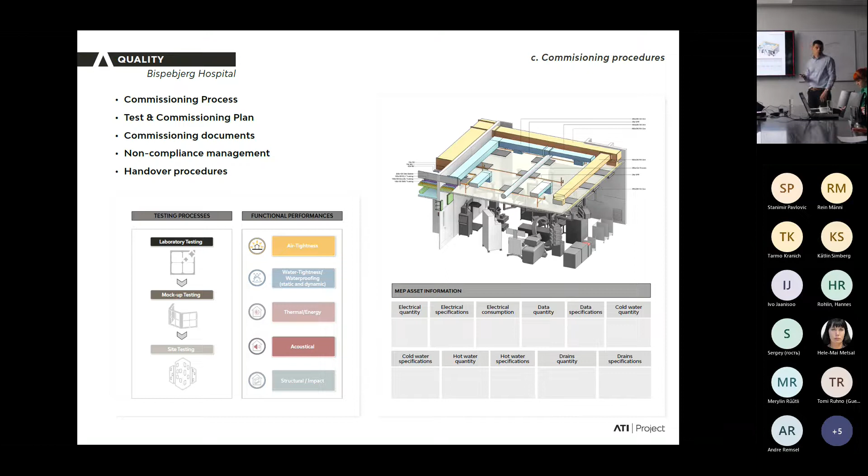Sorry, how did you hand over the models? In which format, was it a database, or?

During the development of design, we were sharing IFC files every two weeks. In the end, we also gave the Revit files because it was part of the contract, plus all the folders organized by discipline and by buildings, with all the populated data actually delivered in Excel format in different folders with the dates and the models. We actually handed over our server to them, because that was the deal in this case. Sometimes, when we want to sell after-handover services, we keep it for ourselves and sell our time for doing it, but usually that's not our core business.

And then I've seen models that had links to specific files and folders integrated. Absolutely, yeah.

This is the system we agreed on at the current stage we're working on, managing the Dalux platform here in Builder for different equipment. Everything is coded, and this app is basically very user-oriented. It will be used by doctors, medical staff, and also the operation and maintenance team. You can go around the hospital, touch whatever you want, and get all the data sheets directly with the app on your cell phone, because it's linked through a QR code with all the data we have in the model, and you can read it directly. It's really user-friendly, and this will be one of the most advanced systems. If you think that one operating theater can have something like 200 different pieces inside, it's really a lot of information.

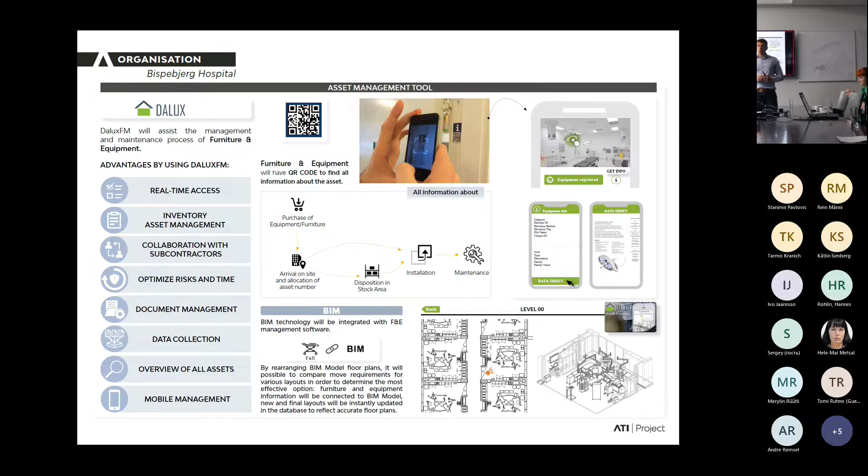Does it exist in the model also? Yes, it does exist in the model. For example, if you go to the Bispebjerg model and you select the wall, it will give you - you can open the sheet and it will give you which kind of building this wall is part of, which floor we are talking about, what time it will be built, what is the thermal transmittance, what is the acoustic performance, what is the permeability to wind, what is the permeability to water, all the technical sheets. And even the technical sheet of who is the producer that will be delivering this, then you have the producer too. So all these data are collected.

Let's say the geometry is the smaller part of the work. The bigger part of the work is the non-geometrical data population. You define the attributes there, whatever you want.

Can you use this data in the budget also? Of course you can, according to how you make your codification system - normally CCI, CCS, normally they start by working categories. Then you always implement, you don't have to, but usually you're asked to implement some UBS that gives you geolocalization - so where are you, in which building, in which floor, in which time frame. And this is always required because you're not only required to give the global budget, but also how much I'm delivering this month, this year, in this stage, and whatever.

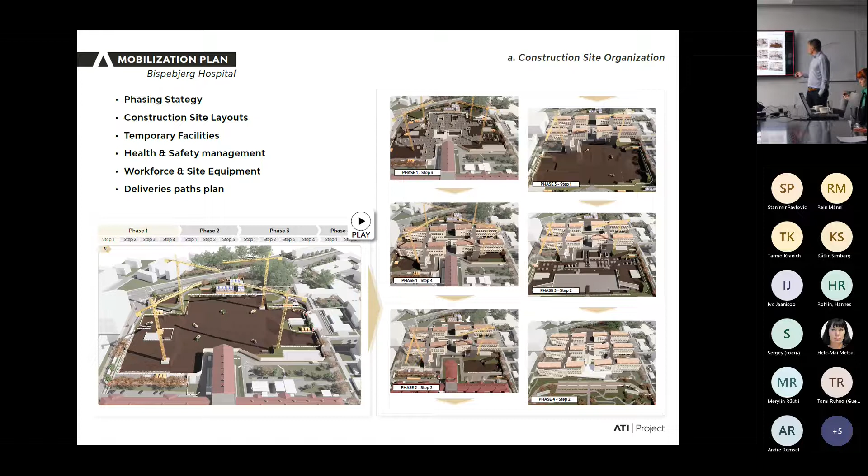We have 10 more minutes. Are you going to take the questions separately? However you want, I think we are more or less at the end.

We can pass through, let me just explain this one for the price. It's very short, and then we'll see, because I think I've touched most of the questions. Yes, so this was the pricing

awarding system in Bispebjerg, which was very interesting because they had a target price. They said, this is my target price, because sometimes in a tender you actually don't have a price, you just have the tasks to price. Here there was a target price. They said, okay, if you manage to be under the target price, that gives you 7 out of 10 points, which then becomes 25 by simply bringing them into proportion.

If you go lower, up to minus 20%, you get the maximum 10 points. If you go higher, you can go down to 1 point at plus 20% above the target price, which was the end of the old tender because the target price was pretty low, so everybody was basically close to the maximum price. But anyway, you get 1 point, and if you go higher than plus 20%, you're out - you cannot submit the competition.

So they didn't give total freedom. Well, it's pretty much freedom, because when you have a plus minus 20% frame, it's very big, since it's very related to the size of the tender.

Usually, if you have a 10 million tender, a small one, you will find a gap of 30% between the lowest and highest offer, because companies are too small. So it's enough that one company does not have enough work - they'll make too aggressive an offer, or maybe they are not capable of doing the right calculation, so they make a mistake.

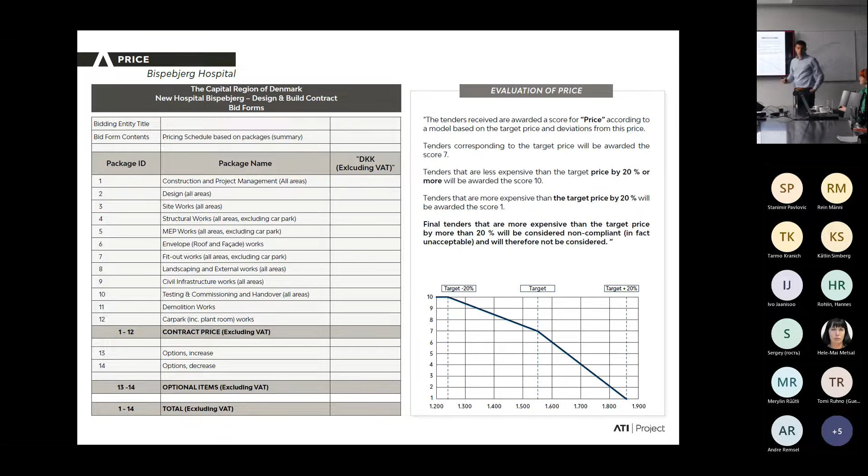When it's a big tender, usually there's a 20% gap between lowest and highest offer - it's very high. When we're talking about 200-300 million, it's really pretty high. So they make a pretty big gap, but then here the tender finished pretty high.

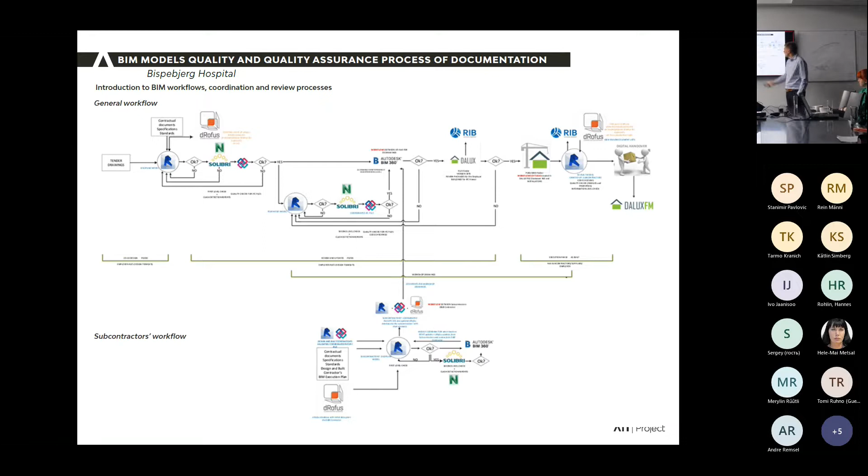Okay, those are what you already see. This is some of the flows - the designer general workflow with the contractor, and this one is with the subcontractors before going to the construction site. This is what I showed you before, the different disciplines and different parts of the model.

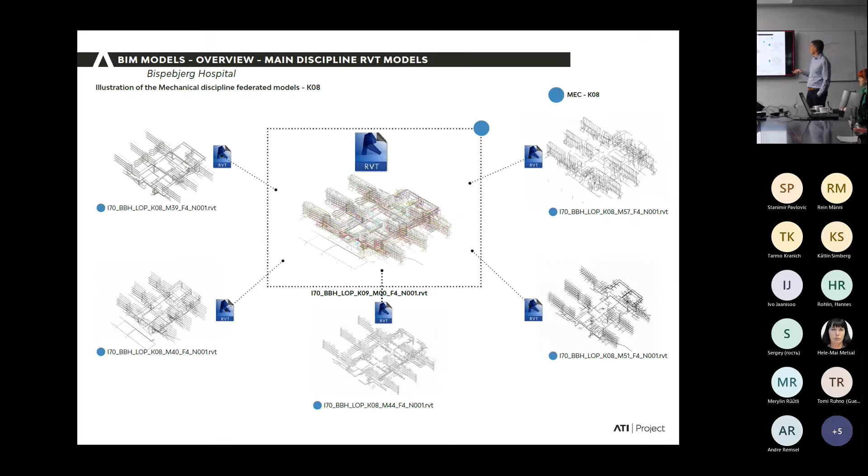Here we are with the mechanical, with 45 models that I showed you before. And this is the last one, the Luxembourg one, 200 million, very concentrated on the organization of the construction site and reducing impact on the external buildings here.

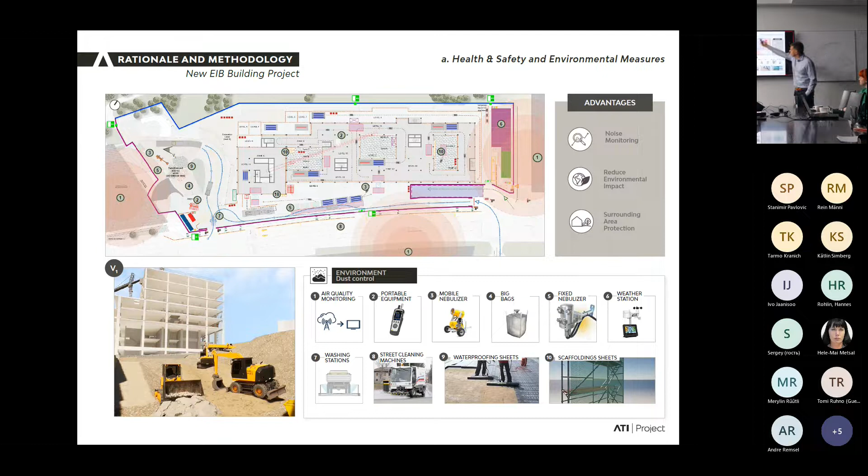This is the last one that we won like 4 or 5 months ago. Very interesting with the models here - extremely advanced BIM model that we received at the tender stage.

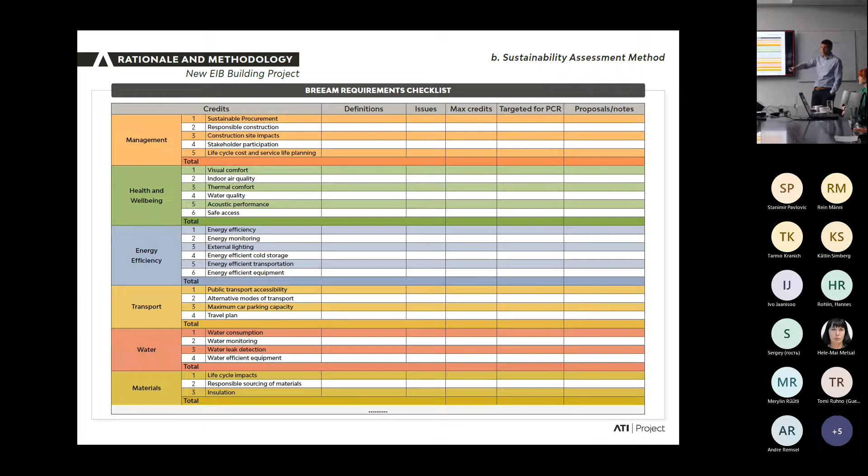And they asked for implementation of BREEAM criteria, which is a sustainability quality system like LEED. Every single parameter is supposed to be implemented as a model characteristic. So it was a particular requirement of this tender.

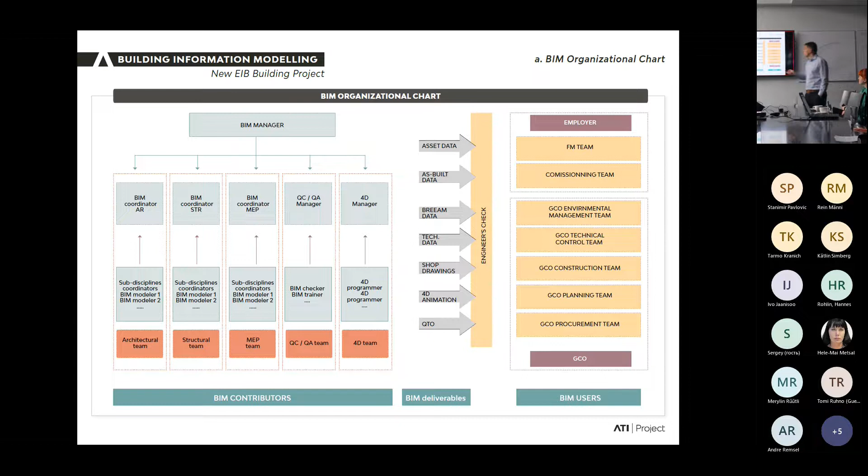Of course, many points go to the risk matrix and detailing of all the possible risks coming out. Really very concentrated on the BIM and the different CVs and backgrounds of different discipline BIM leaders, and global monitoring of the whole process, not only during design but also the procurement and handover stage.

And price was basically the sum of the basic scope, some additional works since they wanted that as a possibility, and the COVID allowances, and the formula was minimum price divided by the tender price. Actually, in this tender, price was 80% and quality was 20%. So they were pushing much more on the price, but it was really very detailed.

And the more design is developed, the less points you can put on quality and more on price, because with this price formula, it's not discount split by discount, but price between price.

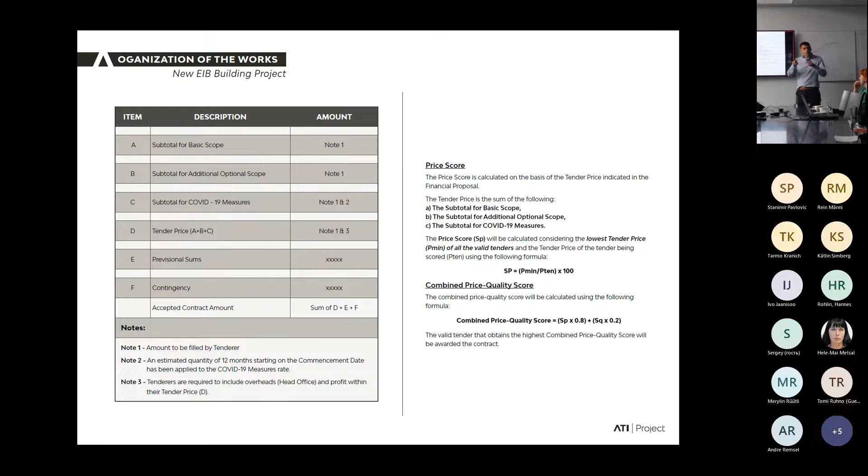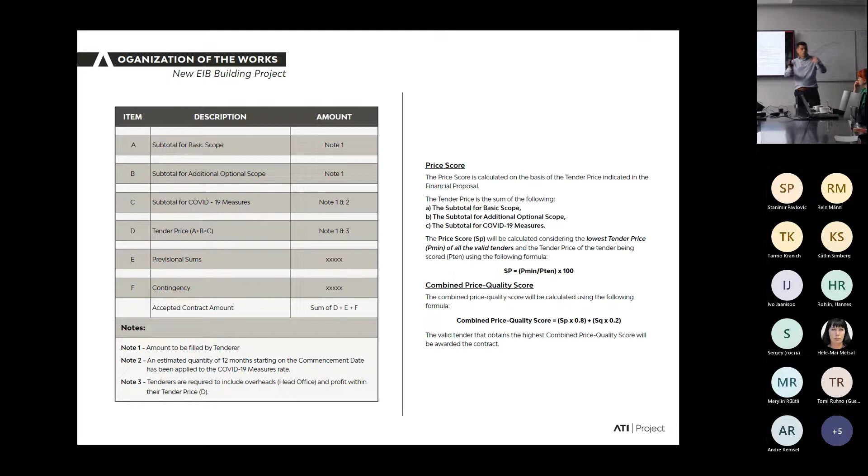And in a tender like this, between the highest and lowest offer, you won't have more than 8-9% difference. So everybody on these 80 points will be actually pretty close, and the difference will be made with the quality score, even if it's lower, because the bill of quantities is very well defined, so you can't have this big gap with the price.

So this is everything. I hope I managed to do it as fast as possible. I don't know if I covered - you can start, Kaia, maybe, because your question was there, but we have four bigger blocks. I don't think we can ask you all these 20 questions, but at least maybe a couple from each block.

Listen, I'll go with my own interest first, since that wasn't touched on too much in your presentation. So from the facilities management point of view, do you have those specialists in your company yourselves, and at what stage do you involve them?

Okay, we were working with MEP subcontractors on different contracts. For example, in Odense we are doing this, and we will do this in Bisper - we are already engaged even if we haven't started. And we finished it in the data center and many other projects in Italy.

We are not doing ourselves any assistance to operation management. We are just working on the models as a designer, as a construction manager.

So the procedure is normally, we have these elements modeled in our model. We choose some products and the sheets and data sheets, and write 'or similar' and populate the model like this. Once the subcontractors are on board, usually we get most of our design involvements ended up that they engage us to do also the as-built model, and follow up as construction manager to the end of the day. So whatever was our first idea about products and systems that were populated in the model, sometimes they match, sometimes they don't. We updated according to what was really built and put in place.